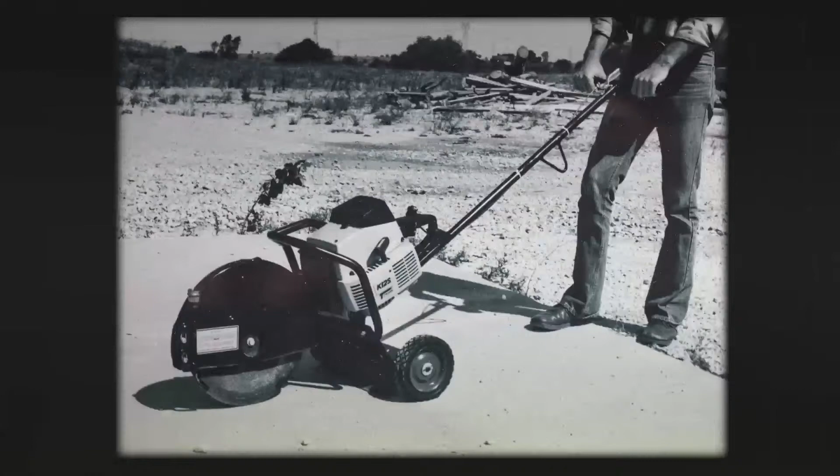The real start to Paratech was the saw. Partners Robert Benker and Howard Leibovitz discovered the Swedish chainsaw that they thought would be effective for the fire service, and that proved to be correct. It took off all over the United States. It had to have special blades. Howie Leibovitz invented a negative pitch that nobody else could replicate, so we began making those ourselves. That's what gave us the manufacturing core to Paratech. We had this capability, and now we wanted to fulfill it with new products, new ideas.

It all started back in 1962. Our first ever tool was the Pry-Axe. The Pry-Axe was developed by a battalion chief in New York City Fire Department. He had what he thought was a prototype for somebody to make it for him. This was while I was in the Army. My two partners, Howie and Bob, agreed that they'd like to try it.

The first run was 2,000 units. When I got out of the Army in 1965, my first task was to get rid of these damn Pry-Axes, because they were costing us a fortune sitting here. Little by little, they gained recognition, and we started building in improvements to the tool. Each time we made a release of forgings, we tried to incorporate features into the tool that would make it better. Every change in the tool was an improvement.

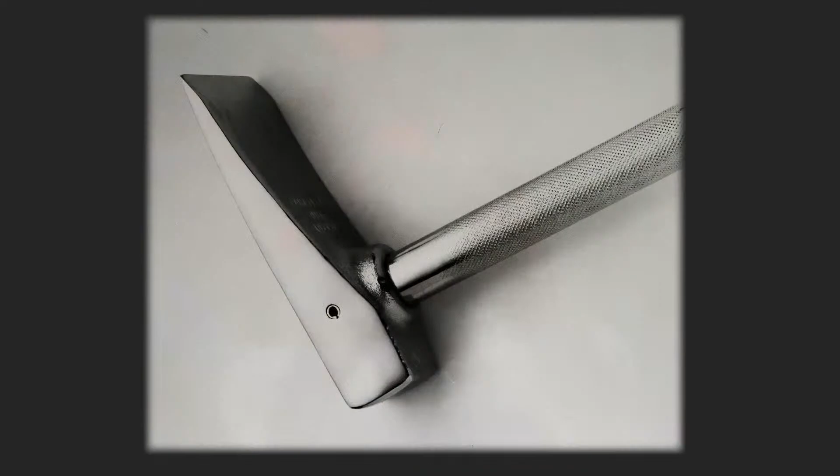From one innovation to another, meet the Halligan tool. The fire departments had very limited choices. Some fire departments were doing forcible entry with a crowbar that they got at the Ace Hardware store. So when they'd see this quick and decisive forcible entry tool, that was a fairly quick success, and we did send thousands of them. We used to weld them, but the weld wasn't as good because it was damaging the structure of the material. So we pressed this.

The first three-piece production Halligan tool, and the first to improve upon the original Chief Halligan design. I designed new claw and new head, so it's more practical. The claw is more sleek, but it's bent more, and it has a nail pulling feature. The head had two wings like on the side of the pike. When you hit it in a metal lead in a car, you could twist and open up the hole, so it became a completely different tool. And the Halligan tool has a major place now in fire departments.

Recognizing the need for new, innovative firefighting tools, the Biel tool. Howie wanted to design this very small personal tool. Spell it backwards, it's Leib. Leibovitz. That's what he wanted, so I had to do that. He wanted to have a Biel tool, and that's the name.

A few years ago, I redesigned that again. It's cast out of stainless. It's very strong, stronger than steel. It's like 180,000 psi. All we do is put a rubber handle on it. We just press it together, so this is like indestructible. The smallest, most portable axe in a fireman's arsenal. Designed by Paratech's founder, Howard Leibovitz, to ensure that even officers have a tool they can carry without restricting personal mobility.

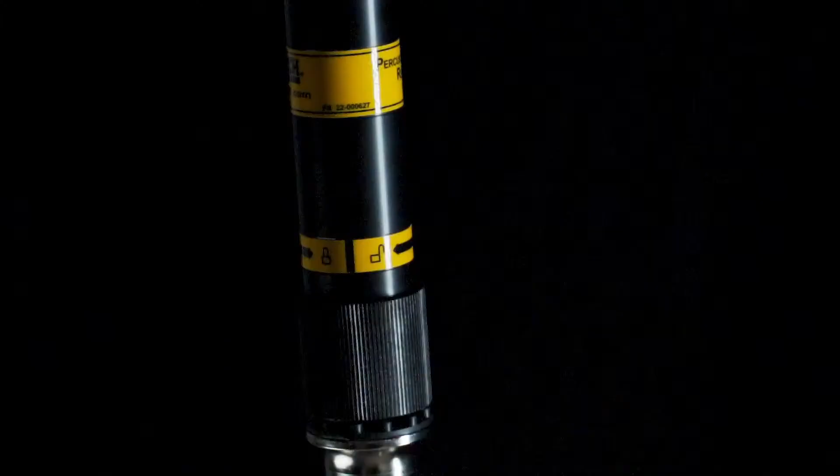There's no deflection. I wanted to make it lighter and more modern. I developed one with the aluminum housing, so it was lighter, it was more efficient, and there was a special lock that when you turn, you can lock it in different positions. All of the force that is being expended is directed at the point of the tool. The ultimate disaster preparedness tool. No strings attached. Safely direct optimum impact exactly where you want it.

New problems require new tools. Titan Crash Axe, the lightest, most advanced personal rescue axe, designed with and for the pararescuemen, the PJs, U.S. Air Force Special Operations Command.

This was the first product I worked on. Some members of the Air Force pararescue guys had purchased one of our Biel tools and tested it without us knowing about it. They said, hey, we really like this product. Here's the thing, we need the whole thing to be under 2.5 pounds, because everything that goes up in an airplane, the weight matters a lot. That's why we went to titanium.

We started that project with full-size pencil sketches, to clay models, to 3D models, to I had a whole Tupperware container full of 3D prints, just tweaking and changing things. The whole thing is skeletonized, kind of trellised out so it provides a really strong grip with gloves and gets the whole thing under that 2.5 pound limit. Engineered to be as light, strong, and customizable as possible. The only one of its kind.

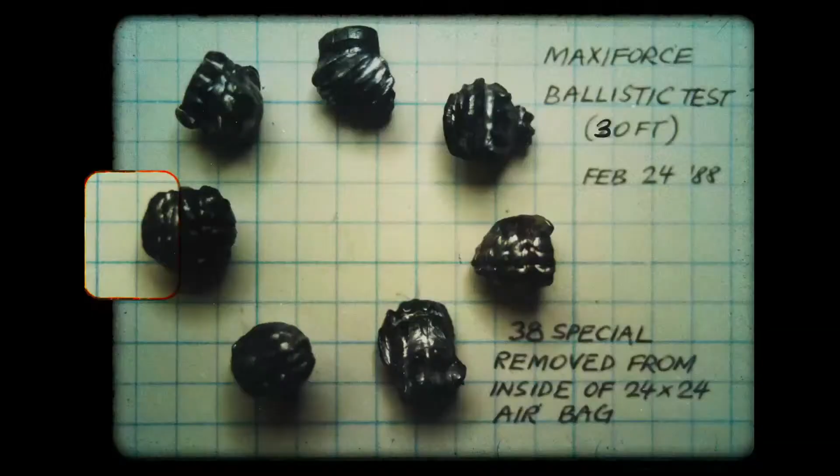I went to work and I said, Howie, why did you hire me? And he said, because you're crazy. I like guns.

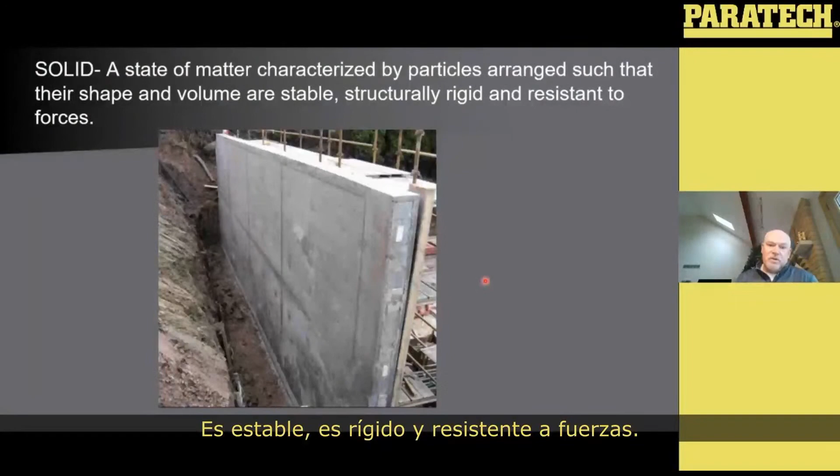But now if we look at soil, it's made up of many different particles arranged such that their shape and volume aren't stable. It's not rigid, and it's not resistant to forces. So soils really aren't a solid. And if you think a trench wall is solid, you're fooling yourself.

Looking at this image, if you go out in nature, you never see vertical soil walls. You just don't see it. Somebody might dig and it holds a vertical wall for a while, but soil just does not have the strength to maintain a vertical wall. That's why you see things like concrete and steel, and sometimes those don't even stay stable for very long due to the forces behind it.

So if you think of soil, it's made up of individual particles. You've got large sand particles, mid-sized particles that are silt, and tiny particles that are clay that can really only be seen individually under a microscope. Soil can be made up of any of these or even all of them, and it always has air around it too. So soil itself is not a solid.

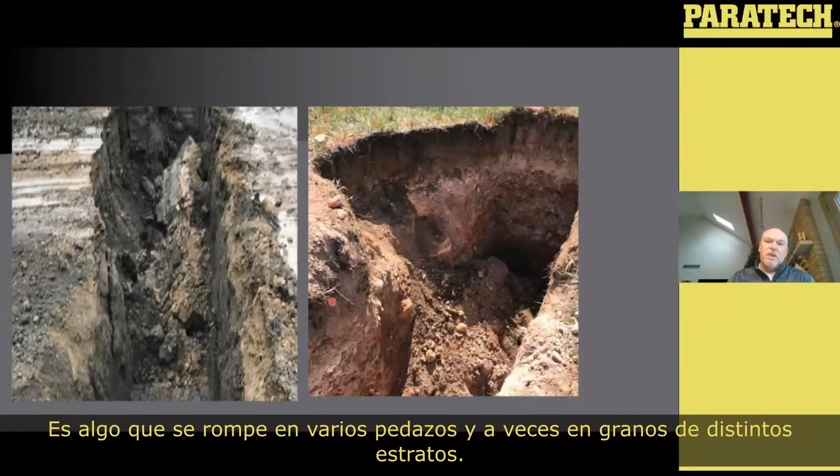So if you look at a trench when it fails, it falls into chunks of dirt. It's not a complete wall that falls off and stays solid. It's something that breaks up into pieces and parts, and sometimes individual grains if it's dry enough.

So where do the forces come from that act on a trench wall? The largest single force you have to deal with is gravity. If you can imagine gravity pulling down on all these individual grains over time, it's going to pack them in more and more. As it goes down, it starts wedging in between other particles, which creates a lateral force pushing outward. That really causes the lateral force we have to deal with when it comes to shoring trenches. It's that wedging force of particles from gravity that turns into a lateral force.

Other external forces we deal with are surcharge loads. Most often it's the spoil pile set back just behind the trench lip, but it can also be materials or equipment that are placed there. The other thing we have to worry about is vibrations. Vibrations can do a lot to destabilize the soil structure. This could be equipment running on the site, a nearby railroad, or even a nearby highway. So it's always a good idea to get everything shut down within a pretty large radius of the trench site to keep those ground vibrations down.

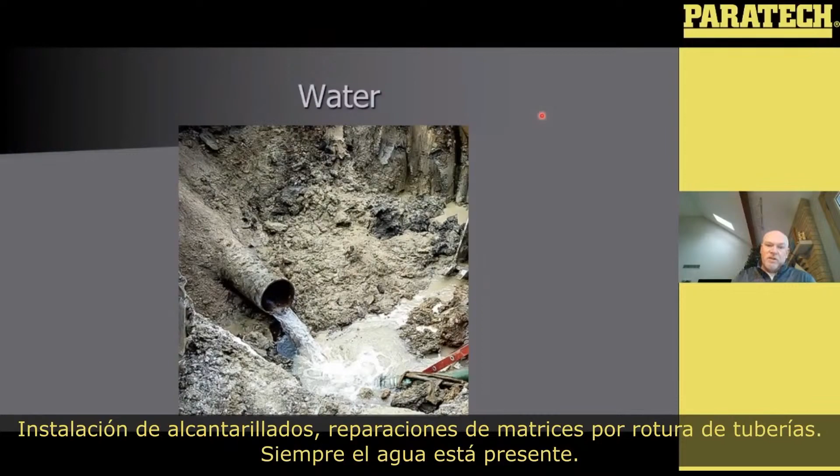Water is another problem we have to deal with all the time too. Many trenches are being dug in order to deal with some type of water issue, whether it's installing sewers, water mains, or fixing broken pipes. There's always water present, and water being in a trench can change the characteristics of the soils we're dealing with.

So what water does to us is it creates hydrostatic pressure. Like I said before, the grains of soil are all separated, with little tiny air spaces between them. And when you saturate it with water, that water pushes in every direction, up, down, and out the sides. When you get a lot of water in there, it starts increasing that lateral pressure by pushing it out sideways.

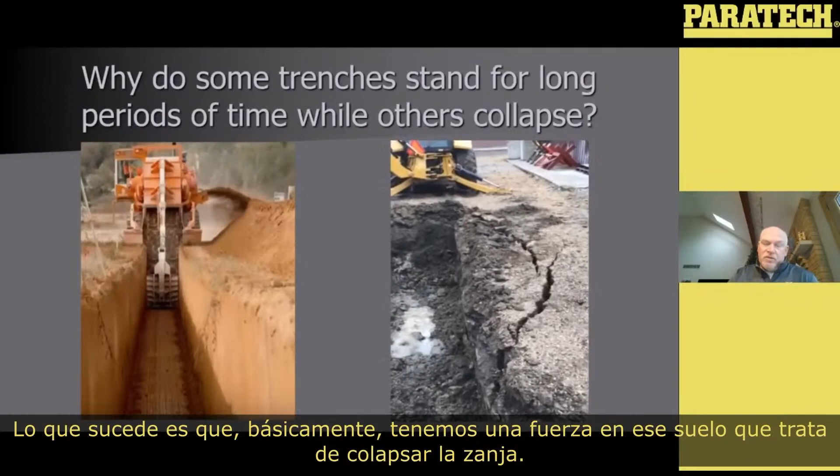If you look at the right side of the screen, it's actually a video playing. It takes a while to develop here, but you do see a shallow trench that was dug, and there's a pretty large crack in it. If you keep your eyes on the crack, you'll see it consistently getting wider and wider. So basically what's happening is you've got a force in that soil trying to collapse that trench, and the soil strength is not enough to keep it from collapsing. The result is the trench collapses.

So what is internal strength in soil? Basically, it's made of three different mechanisms: soil friction, adhesion, and cohesion. I'll explain each of these as we go forward.

So internal strength, soil friction. Basically, the particles all have some shape and angularity to them, and as these individual grains start locking into each other, that creates soil friction. If we look at the picture on the left, that is the soil when it was poured out of the cup. If you did that over and over again, you're going to get pretty much the same shape of mound there due to the soil friction of the particles.

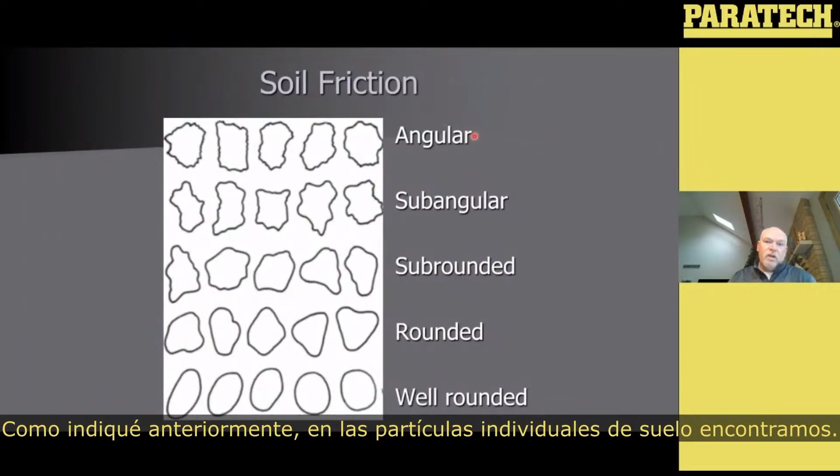So as I've mentioned before, the individual particles of soil range from angular particles all the way to well-rounded. If you imagine trying to stack BBs, you just can't do it because there's no friction between them. No matter how much you try to stack them, they always go down to the lowest point, so you're down to one layer. The same thing can happen with soil when you have well-rounded particles. Now your angular particles have more lips and edges that are going to lock into the other ones, which will give you a higher soil friction.

The other thing that plays a big part of it is the compaction of the soil. The more air you have between those individual soil particles, the more they can move around as you put loads on them - they can twist and kind of wedge in, which will push other ones sideways. Whereas with compacted soil, there's not many places for it to move; it's all been packed together already. So a compacted soil is going to give you a much higher soil friction capacity than a loose soil would.

The second mechanism we're going to talk about is adhesion. Adhesion happens primarily in sandy soils. If you add a little bit of water to it, just like we saw in that video, you can go from just having a pile to something that will hold its shape. The reason this happens is the water coats those individual particles, and once they're coated with water, they attract to each other, kind of like almost a magnetic force that holds it together.

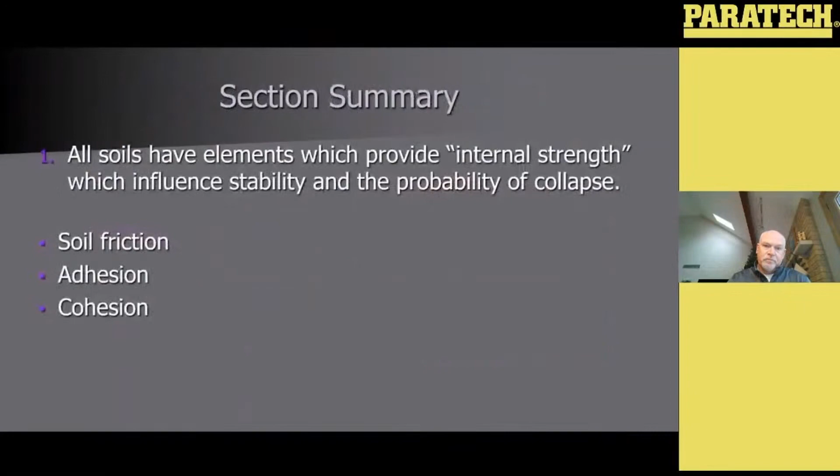So in summary, all soils have elements which provide internal strength, which influence the stability and probability of collapse. This internal strength comes from soil friction, adhesion, and cohesion. You can have any one of those, or all three, acting together to give you the total internal strength of the soil.

The opposing side of that is the external forces. These come from the lateral load that happens due to gravity, surcharged loads up on the trench lip, vibrations that can be anywhere near you, and water and its impact on soil.

So if you have more external forces trying to collapse the trench than internal forces trying to resist that collapse, that leaves you in a position where you're going to have a trench collapse. That concludes my section here, and I will hand it over to Ron for the next section.

The basic knowledge of soil mechanics that Craig presented is meant to provide an understanding of why shoring principles and practices used for stable and static soil conditions may not be applicable to the unstable and dynamic soil conditions so often found at trench rescue incidents.

Workers who install and repair underground utilities are typically on the scene during the excavation process. That provides an opportunity for shoring trenches before the soil becomes active. Rescuers, on the other hand, typically arrive at the scene after a collapse, during a time when the soil is unstable and dynamic, or moving.

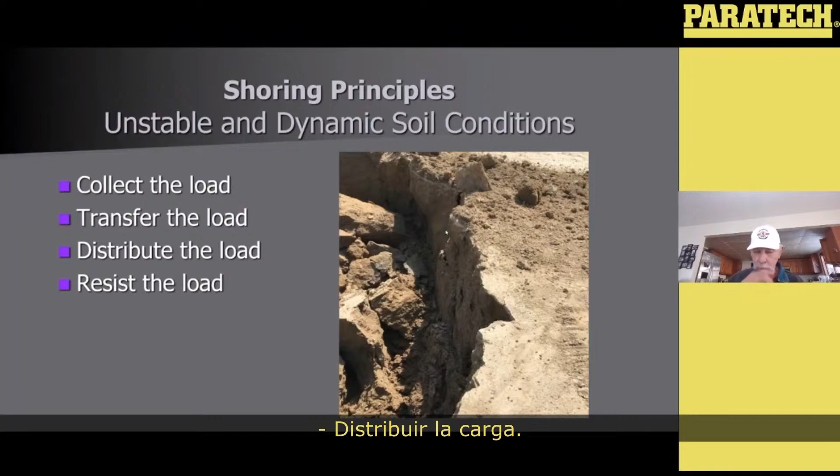These principles and practices can be found in the U.S. Army Corps of Engineers shoring guidance for structural collapse incidents. They've been safely and effectively used by urban search and rescue teams for about 2 decades.

Fundamental engineering construction for buildings includes the same principles. They include things like columns, beams. In this case, a large beam is called a girder, which holds other smaller beams. Floor joists are called beams, and those hold the decking or sheeting up above, which keeps the moving materials from falling in between the beams.

Pretty much the same concepts go on here in structural collapse shoring. The beams are up here, we call them headers and sole plates. We have posts or struts. Very, very much the same concepts that we need to put into place during trench rescue shoring.

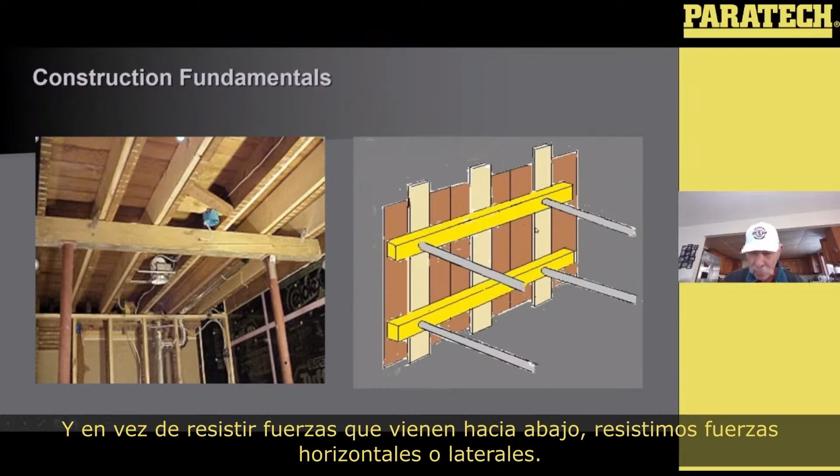With trench rescue shoring, we simply take that same construction and tip it 90 degrees, or on its side. Instead of resisting forces that are coming down, we resist forces that are horizontal, or pushing sideways, like in a trench wall.

Shoring principles: collect the load. It's very important that we utilize this principle in order to keep our small particles of soil collected together.

Trench rescue panels of laminated Arctic birch and engineered strongbacks, in what you'll learn in section 4 to be a composite construction, are very strong, and they'll collect and retain those lateral soil forces that are associated with most trench emergency incidents.

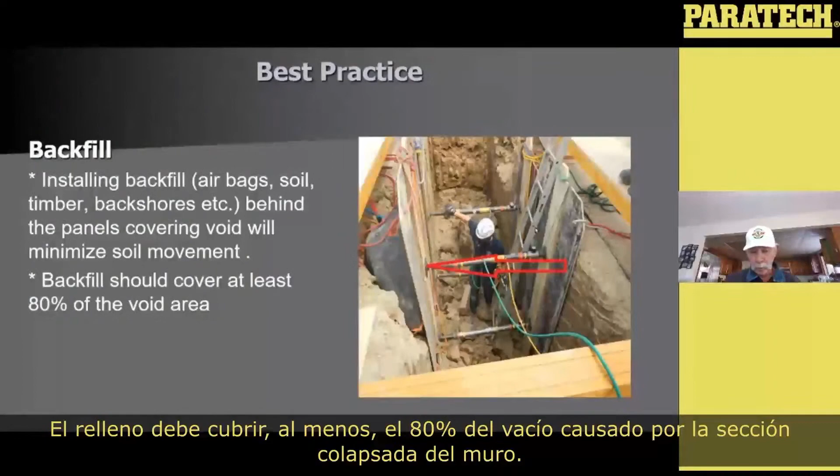Also, to collect the load in collapsed walls that have voids in them, we must fill the voids in order to maintain soil contact and prevent movement behind the panels. Backfill commonly used includes installing airbags, soil from the spoil pile, timbers, backshores behind the panels, and covering the void areas. The backfill should cover at least 80% of the void area caused by the collapsed section of wall.

Transferring the load from a soil wall to a point of suitable resistance. So how do we take the moving part of the wall and transfer that load to resist and keep it from moving? It's called transferring the load, and we do that with struts.

The best practice for struts is struts that are readily adjustable in length, have measurable activation forces, and can be installed and removed without entering the trench. Those are the best practices for unstable and dynamic soil conditions.

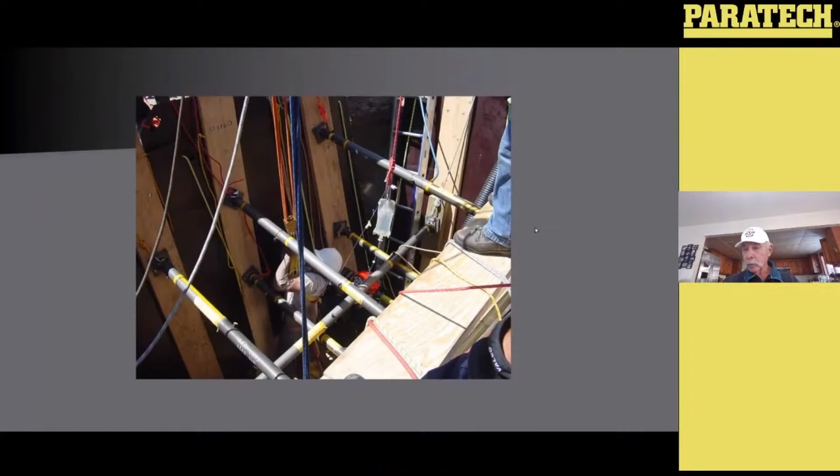Both Paratech gray struts and the longshores, or what we call the gold struts, are capable of rapid adjustments from air pressure. We can expand the length of the strut very quickly and easily. The pneumatic controllers and gauges provide measurable activation forces. And most importantly, both Paratech gray and gold struts can be installed and removed without entering the trench.

There's a lot of confusion over the topic of strut pressures and forces, and we'd like to try to help eliminate some of that confusion.

To begin with, we need to understand there are two distinct forces associated with the use of struts. One force is called the strut activation force. All struts used for trench rescue shoring have a mechanism that creates an activation force. With timber struts, we typically use opposing wedges or screw jacks to tighten up the struts and create that strut activation force. With hydraulic and pneumatic struts, they use cylinders and compressed fluid or air to create those activation forces.

That strut activation force in these pneumatic struts is a result of the area found at the end, how many square inches are at the end of the strut's piston. We have a diameter on the gray struts of 2.5 inches in that area, and 3 inches on the gold struts. The formula for that is pi times the radius squared, and remember that the radius is half of the diameter. So in this case, on the 3-inch strut, the radius would be 1.5 inches.

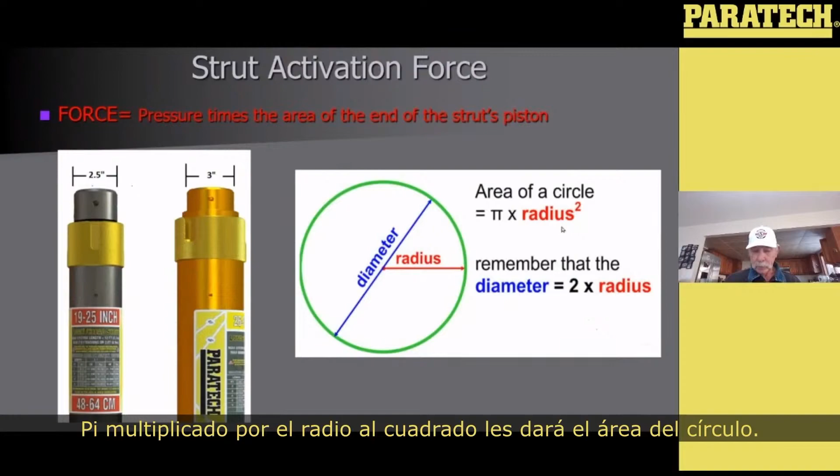Radius times radius times pi, or 3.14 - we'll give you a couple of seconds to write that down if you want to write down that formula. Pi times radius squared will give you the surface area of that circle found at the end of the piston on the struts.

The best practice for activation forces in collapsing and unstable soil conditions is to get an activation force of between 1,000 and 1,250 pounds. With the gray strut, the 2.5-inch diameter, using our formula, we get a surface area of almost 5 inches. So an example of how to use that formula: if we set our gauge at 200 pounds per square inch, and we have 5 square inches, we multiply 200 times 5, and that gives us an activation force of about 1,000 pounds. If we up that to 250 pounds, still times the 5 square inches, we get 1,250.

With the gold struts, because it is a bigger diameter, our strut pressures in pounds per square inch are less, but we're still trying to get very close to that best practice activation force of 1,000 to 1,250 pounds.

The activation force is important. It pushes the panels and wales tight up against the wall, so we want enough pressure and force for that to happen. And two, the activation force of the struts can actually make the panels and the wales stronger and give them more capacity. So we don't want too much pressure, but we don't want too little pressure. In these types of soil conditions, 1,000 to 1,250 pounds is what we're shooting for.

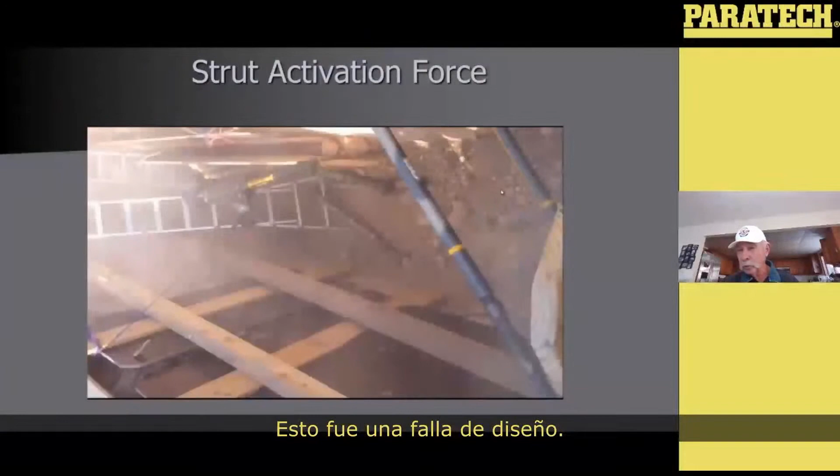This was a failure of the design, which was put together or dreamed up by a firefighter and never was reviewed or designed by a professional engineer. And those are the kinds of myths and folklore. This thrust block system, the original thrust block system, was never engineered or tested, and it is a dangerous system.

If you're using that system, I would urge you to stop doing that and find another alternative for your L-shaped trenches. Write this down. This is a pretty good, simple rule to remember.

If the shoring system you're setting up cannot resist the recommended strut activation forces, it will in no way be possible for that system to resist the forces of dynamic soil pushing against it. It just can't happen. So if your system is moving when you put the strut pressure to it off of your air gauge, you have a poorly designed system, and you better get something else in place.

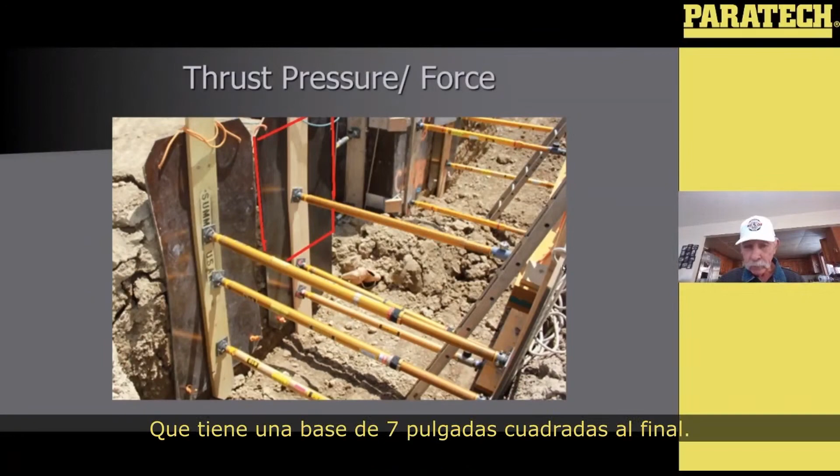It transfers that load to the wall on the right side, transferring 14,000 pounds of force through a very concentrated or small 3-inch diameter strut that has a 7 square inch base at the end. That is what's called the thrust pressure.

The thrust pressure is really what we need to be concerned about being able to resist. The activation force puts our strut into place. We have to be prepared for the thrust pressure or thrust force that the soil can create. Again, those myths and folklores that have entered into our shoring systems, this thrust block system just does not work.

The next principle is, after we've collected the load and transferred the load, we need to get it across the trench and distribute that load over a larger area than the strut base size. Struts transfer the load to a point of resistance in a very concentrated manner. That concentrated load placed on the trench wall with weak and unstable conditions can actually cause rather than prevent collapse.

So the best practice for taking the load coming through the strut is to place a strong and stiff trench rescue panel between the strut base and the wall. That helps distribute the force of the thrust against, in this case, a 4x4 section of panel rather than a 5 or 7 inch strut, the end of the strut piston.

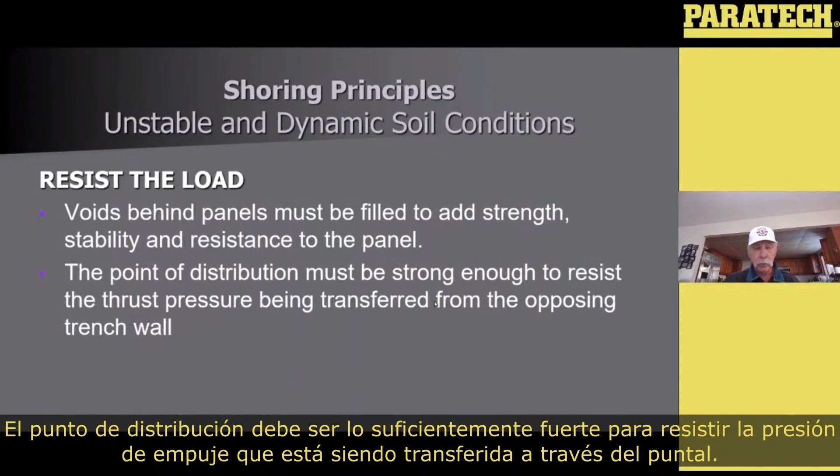The last very important part of the shoring principles is to resist the load. Voids behind the panels must be filled to add strength, stability, and resistance to the panel. The point of distribution must be strong enough to resist the thrust pressure being transferred through the strut.

The way we resist the load, we showed earlier this airbag in place to help collect the load from the force of the soil coming from left to right. But we also need to have that resistance or backfill in place to strengthen and help resist the force coming from this trench wall moving from right to left. So we need to fill that in, and backfill should cover at least 80% of that void area.

So for shoring dynamic soil conditions, the unstable, collapsing conditions we see at most of our trench rescues, these are the important points: collect the load, transfer the load, distribute the load, and resist the load.

There are other types of shoring with different principles. Basically, the types of shoring done in underground construction work, where right as the trench is being dug, shoring can start before the soil loses its internal strength and starts to move.

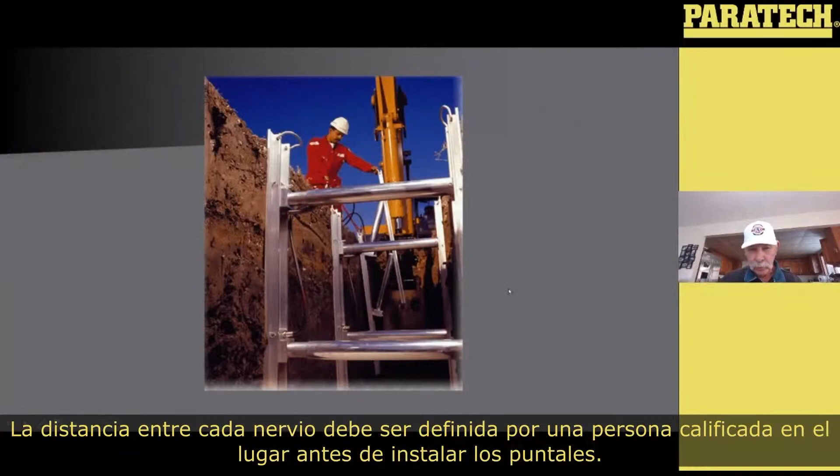I asked our group of structural engineers how they felt about using that skip shoring idea at trench rescues. Dr. Marie Labaud did a study and wrote her dissertation for her doctorate degree on that particular subject. She says that in dynamic soil conditions, without the use of sheeting in between your struts, there's an unaccounted for force right at the face of the trench in between the struts. In real world applications of trench rescue, that exposed face is likely to blow out and cause the trench wall to collapse.

With skip shoring, the manufacturers of hydraulic shores put together this system where they have vertical rails and struts going down the rails to create points of resistance. But they also came up with something called a spot shore, made to use in conjunction with these vertical shores, to supplement the skip shoring in places where there's obstructions like pipes or utilities crossing the trench where that vertical upright just wouldn't fit. So we can use the two of these together. That was the original use of spot shores.

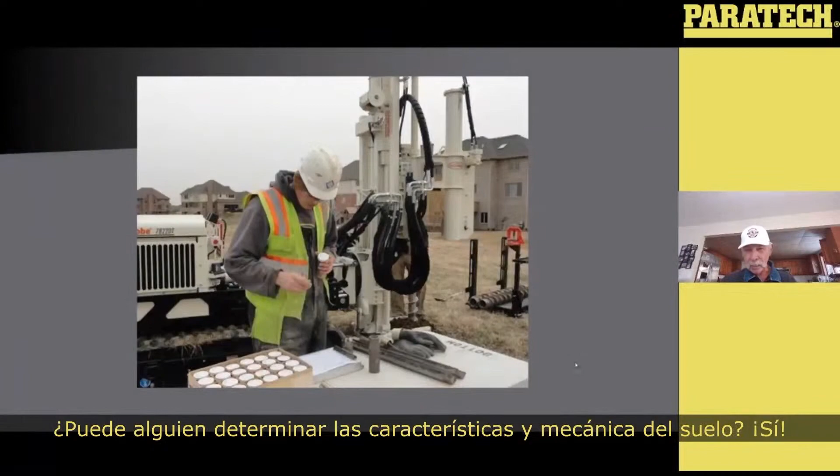Dr. Taylor tells us that the use of skip shoring or spot shoring is only valid for an extremely limited number of soil conditions, and in those soil conditions, the soil properties and behavior characteristics have to be known. He says that such conditions and knowledge are essentially never encountered at a trench rescue situation. So can somebody go out there and determine those soil characteristics and mechanics? Yeah, somebody like a geotechnical engineer using soil boring samples and laboratory type testing could do that pretty accurately. The chances of you and I going out there and accurately making that soil analysis are slim to none.

And Slim just left town. It's just not going to happen. It would be a crapshoot. This is my poster child for reasons that we shouldn't be using field soil analysis to make any determination of how to shore a trench.

This is a very qualified person with quite a number of years of experience working for a large city in North America. She determined that this soil was stable, had an equivalency to an OSHA type A soil reading condition, and she entered the trench. Shortly after that, this soil that she thought was stable was unstable and collapsed, and could have killed her.

It pinned her. The local fire department arrived and knew this lady and asked her what the soil conditions were. She told them still type A soil equivalent. They went ahead and used this thing called spot shoring - they did their own version of spot shoring, trying to expedite the rescue. They took high risks by using this particular shoring principle in this type of soil.

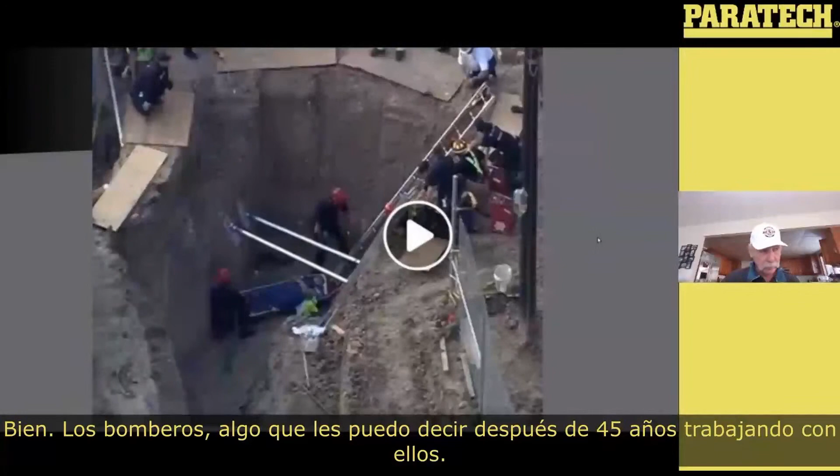Would not recommend it. Now, firefighters, I can tell you after 45, 46 years of working with firefighters, they will stretch the envelope. So if you tell them that spot shoring has to be placed every foot apart, they'll stretch the envelope and end up doing something like they did on this actual rescue scene. It can be very shaky. The fact that they did something, and it worked and it didn't collapse, makes firefighters want to think that it's okay, that it's proven.

Let me tell you about this one. This is my Orange X shore. I have set this Orange X shore up on a variety of different soil conditions across the United States 73 times.

During those 73 times of shoring with my Orange X, the soil never collapsed. The trench wall never collapsed. So the fact that you did something doesn't mean that it's good, and it doesn't mean that it's safe. You might have just been lucky. And as Chief Brunacini told us years ago, good luck can make you dumb because it makes you think you're smart. That's what I'm afraid of with this idea called spot shoring.

Soil arcing principles for skip shoring and spot shoring work in some soil conditions, uncommon soil conditions for us responding to trench rescue. They do not work in unstable and collapsing soil conditions.

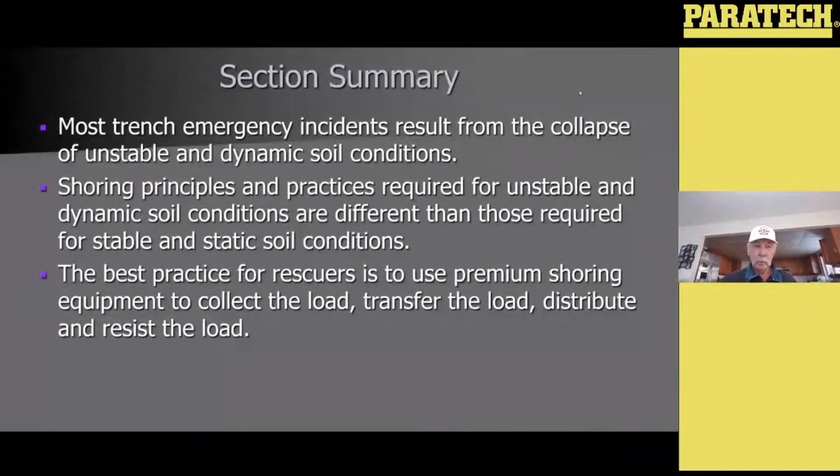Section summary: most trench emergency incidents result from the collapse of unstable and dynamic soils. Shoring principles and practices required for unstable and dynamic soil conditions are different than those that may be required for things like stable rock or some Class A, very stable clay conditions. The best practice for rescuers is to use premium shoring equipment to always collect the load, transfer the load, and distribute and resist the load. You won't go wrong if you use that principle. You may be in deep trouble if you use other principles that are not based for those types of soil conditions that we encounter at trench rescues.

In section 3, we'll learn about a new method that was designed for first responders to rapidly and accurately determine worst-case lateral soil forces. It's important for us to know lateral soil forces so that we can select the shoring equipment and materials that'll both protect us and get us in the trench quickly. It's time to pull out your notepad and pencil and put on your thinking cap.

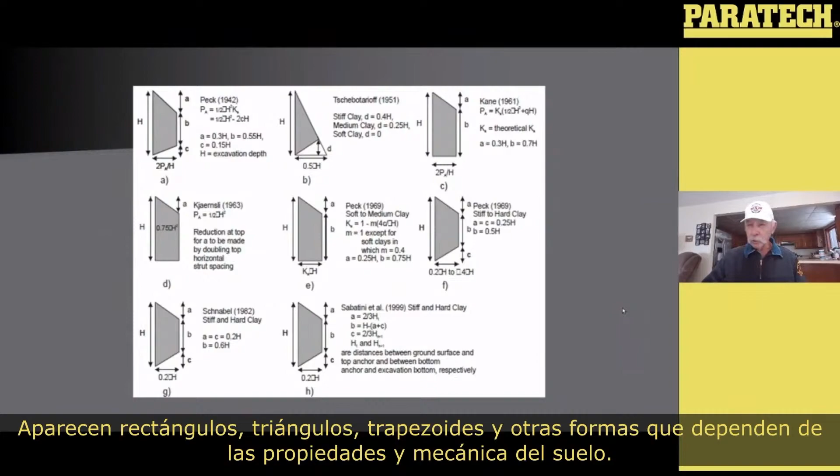Civil engineers have several theories and formulas to help them determine lateral soil forces for different types of soil. This drawing shows a variety of soil pressure diagrams, which are part of the process. The diagrams represent a number of geometric shapes that soil can exert forces on. They include rectangular, triangular, trapezoidal, and other shapes which are dependent on the soil properties and mechanics.

Unfortunately, all of those soil pressure diagrams require soil analysis equipment, expertise, and experience that first responders just don't possess. So a big problem exists in that first responders do not have a way to rapidly and accurately determine those lateral soil forces that are going to have an effect on your trench rescue shoring system.

In 2018, Dr. Oliver Taylor and Dr. Marie Labaugh, at the request of the Army Corps of Engineers and FEMA structure specialists, designed a method for first responders to rapidly and accurately determine lateral forces at the scene of a trench emergency. The methods have been published in an international civil engineering journal and have been reviewed and vetted by structural specialists from FEMA, SUSAR, and the U.S. Army Corps of Engineers Urban Search and Rescue Group.

The beauty of this method is that it does not require technical equipment, expertise, or even a lot of experience. The TL method requires just a tape measure to determine the lateral soil forces and a method for using the specific tabulated data for trench rescue shoring.

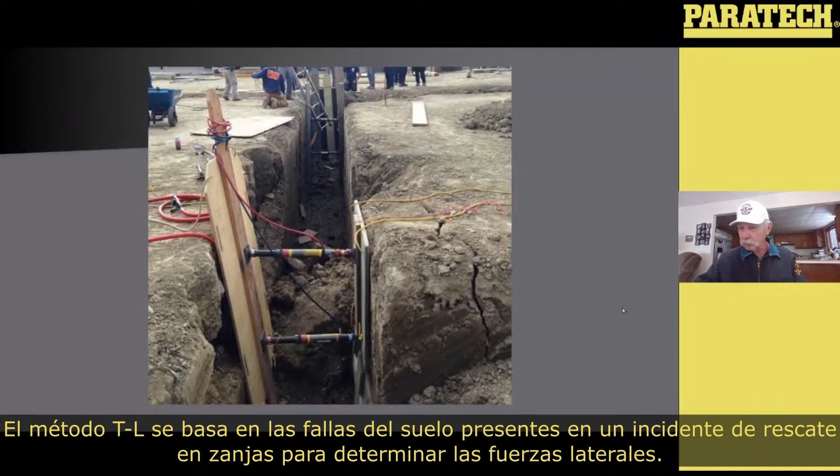The base of the TL method uses the soil failures present at a trench rescue incident to determine the lateral soil forces and to predict future soil failures. Dr. Taylor tells us that the answers to the questions are right there at the trench. Unlike the methods used by engineers that determine soil forces based on soil properties and mechanics and soil pressure diagrams, the TL method uses the size of the largest failure present to determine the lateral soil force that will push against your shoring system.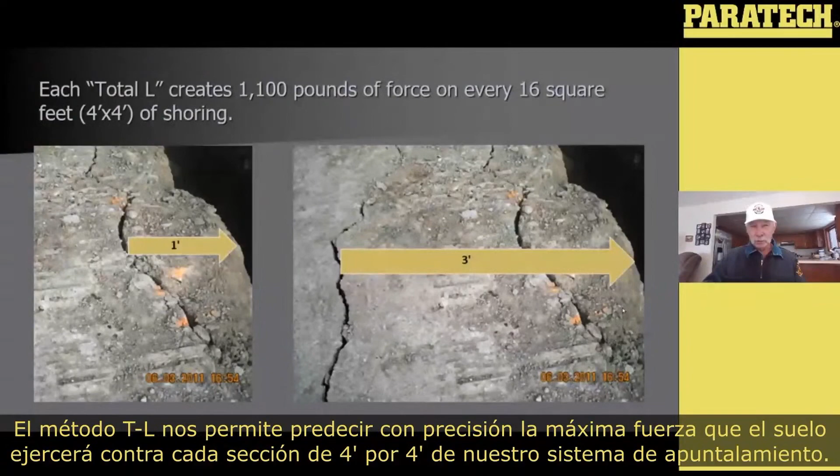The resultant used in the TL method is based on 16 square feet, creating 1,100 pounds of lateral force against your shoring system. Since the formula uses 16 square feet, or a half panel, as a constant, we simply need to add one more dimension to change square feet into cubic feet. That dimension is the distance from the trench wall back to the farthest point of failure. In the photo on the left, that's about a 1 foot span. So 16 feet of panel in front of this section, going back 1 foot, gives us 16 cubic feet of soil pushing sideways against your system.

The fissure or crack, the breaking point of the soil on the right, is larger. It is 3 feet back from the wall, so that represents 3 times the amount of soil pressure on the left. That's 3 times 16, or 48 cubic feet of soil, and 3 times 1,100 pounds. This one would be pushing on each 4 by 4 section of panel with 3,300 pounds of force.

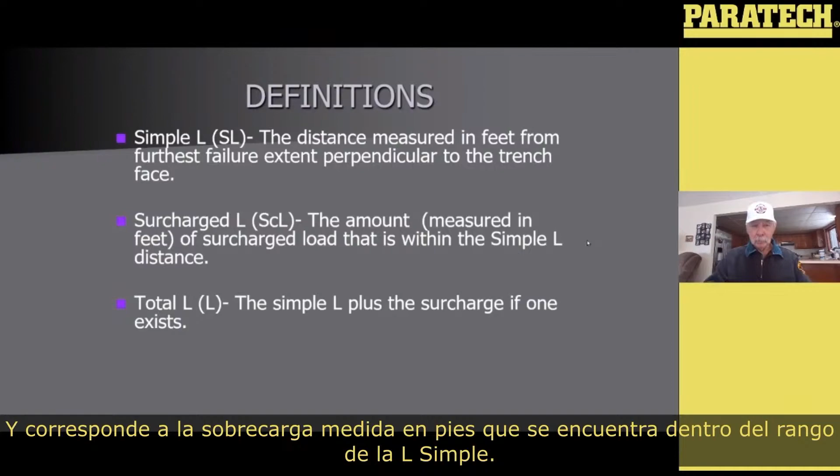There's something called a surcharged L, and that is the amount measured in feet, always rounding up to the next foot. If you have something that's 2 feet 8 inches, we call it 3 feet. It's the amount measured in feet of the surcharge load that is within that simple L distance. Finally, the total L is the simple L plus the surcharge, if a surcharge exists. In other words, if a heavy object is within the distance of the simple L, then a surcharge exists.

Let's take a look at this thing called the simple L. It is the distance in feet measured to the farthest failure extent that's perpendicular, or at 90 degrees, to the excavation face. Here we have three failures in this particular trench. The one at the bottom is a slough-in type failure that goes back about 2 feet from the original trench wall or face. There's another one above that, a little less than 2 feet. And then there's the farthest extent of failure at 4 feet, a pretty deep and big fissure. So we have 3 different measurements, but the one we use as a simple L is the 4 foot, and we call that a simple L of 4.

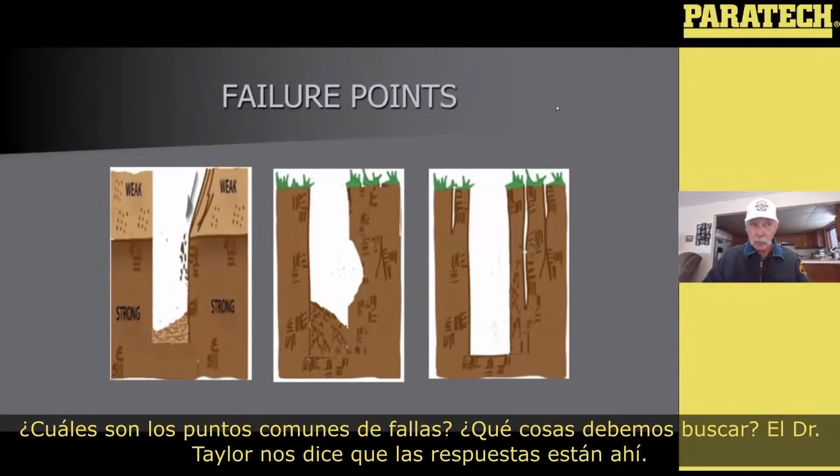What are common failure points? What are we supposed to be looking for? Dr. Taylor tells us the answers are there. Here's what we want to look at: the distance from the original wall back to lip shear. Usually those are just a couple of feet. Lip shears are usually not a big simple L, but we need to measure that. If that is the farthest point of failure, we're going to use that as our simple L.

Other types of collapses would be that slough-in. So as an estimation, you can get a tape measure up at the top without standing over the slough-in, and estimate the number of feet from the original face to the very farthest point of failure in the slough-in.

Another thing would be deep and significant fissures or cracks. This one here would probably result in a pretty good sized wall shear, but until it shears off, we just count this particular fissure. When does a crack become significant? There can be small cracks on the surface on the lip of your trench from drying out — especially clays tend to dry out and get these superficial cracks and fissures. But whenever a crack is more than 1 foot deep or more than a half inch wide, we're going to count that as a failure point.

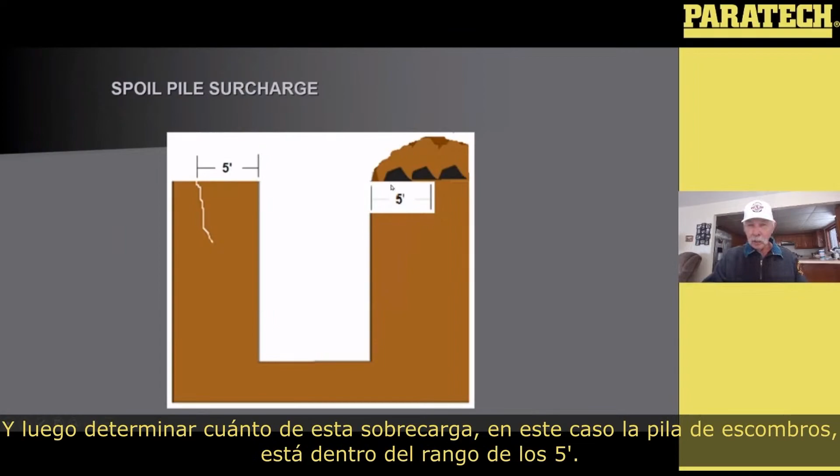Spoil piles: take a look at the spoil piles. What we're concerned about is finding that SL, the simple L, the furthest point of failure at the trench, and then determining how much of this surcharge — in this case the spoil pile — is within that 5 feet. Now, if there was a crack or a fissure here, you wouldn't see it because the pile has covered it up, so I just superimposed that 5 foot mark.

So you could see in this case, because the spoil pile is all the way to the trench wall, all 5 feet of that simple L distance is covered with this object, this spoil pile, and that is the surcharge. So we would use the amount of surcharge as the number 5, as well as the simple L, 5.

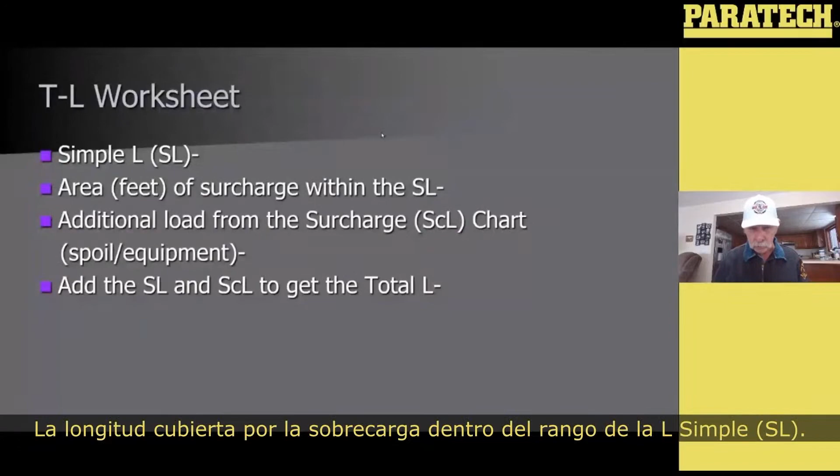Take a second, get your notepad out, write down these 4 things. Simple L, the area of the surcharge within the simple L. Additional load from the surcharge, which is going to come from a chart that we're going to learn to read in just a minute. And number 4, how much do you add to the simple L to get the total L? How much surcharge do you add to the simple L to get the total L? Copy that down, you're going to be using that a few times during this section.

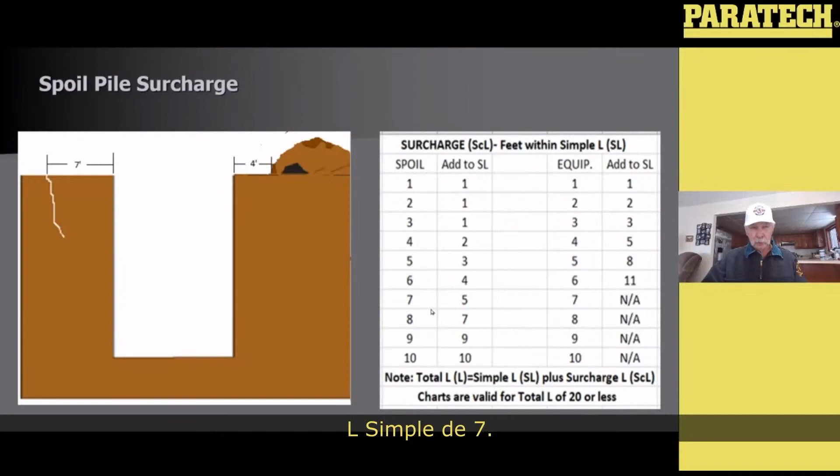And this is what your worksheet should look like based on a simple L of 7. There are now 4 feet of that 7 that don't have a spoil on it, leaving 3 feet of surcharge within our affected simple L area. So it should look like this. The simple L is 7. How many feet of that spoil pile is within that 7? There's only 3. How much do you add from your chart? When you went down to the 3, it told you to add a 1. In this case, we add the 7 to the 1 and come up with a total L of 8.

Surcharge for heavy equipment. Measure that simple L, the point, whatever it is. I'm making it real simple on these. A lot of times you're going to have multiple points of failure, and you're going to take the one that is farthest away from the trench wall. So to make it simple, this one we have a simple L of 5, and then see if any of this machine is sitting within 5 feet of the trench wall. This sits back 4 feet, so that would leave 1 foot of this machine that we're going to be worried about. Okay, 1 foot. Then we're going to take a look at the equipment side of the surcharge chart, and then add them together to come up with the total L.

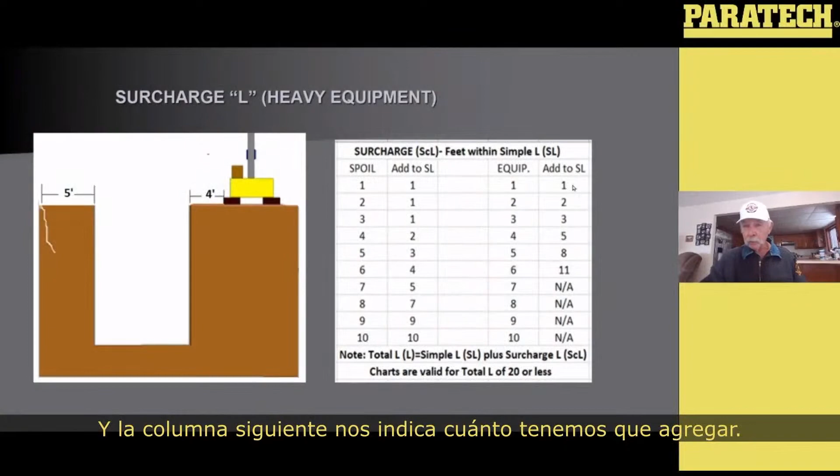So again, 5 feet is the simple L. There's 1 foot, and we're going to go all the way over here to the right to the number 1. There's 1 foot of equipment that is within that simple L. Then go to the column next to that, and it tells us how much more to add. Now, remember, each time we add a 1, we're adding an additional 1,100 pounds to that 4 by 4 foot section of panel. If we've got a 3, if we need to add the number 3, that would be adding an additional 3,300 pounds to that panel and the strut holding the panel.

So in this case, it would just add a 1, and we would add the 1 to the 5, and we come up with our 6.

So try this one on your own. The simple L is 7. The machine is sitting back 3 feet from the wall, and you need to determine how much machine is left within the 7 feet of the simple L. Fill out your worksheet, the 4 points on your worksheet, and see if you can come up with the correct total L, because the total L is what we're going to use in the next section, section 4, to select the proper strut, the proper panel, and the proper wale.

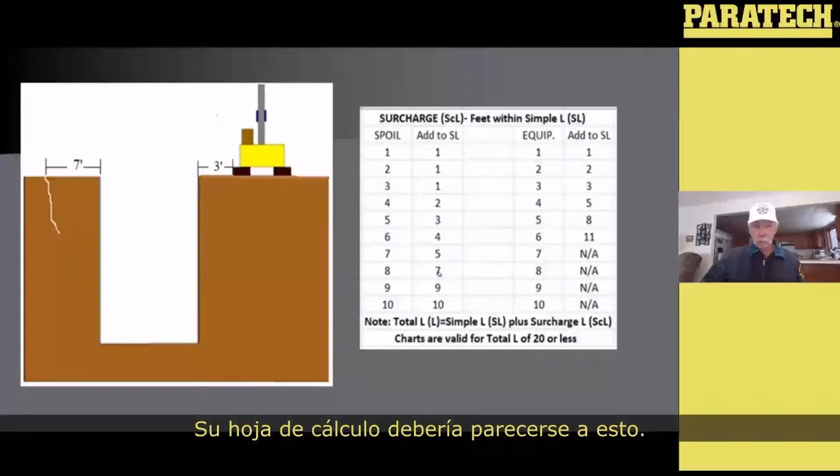Here's what that worksheet should look like. The simple L was 7. There was 3 feet of that not in the 7, right? It's set back 3 feet. So that gave us the area within the 7 was 4. And then when we looked at our chart, next to the 4, it said add 5, because it's equipment. Equipment is going to be always heavier than the spoil pile, so that you get a larger number to add. And then we would add the 7 to the 5 and come up with a total L of 12.

Now, equipment, we're going to consider things like a dump truck, a front end loader, an excavator, a backhoe, heavy steel or concrete pipes that are sitting on the lip of your trench in your rescue area, right? And if they're sitting back farther than the distance that the simple L is, farther back than what your failure has occurred, we're not going to count that. We don't have to worry about that.

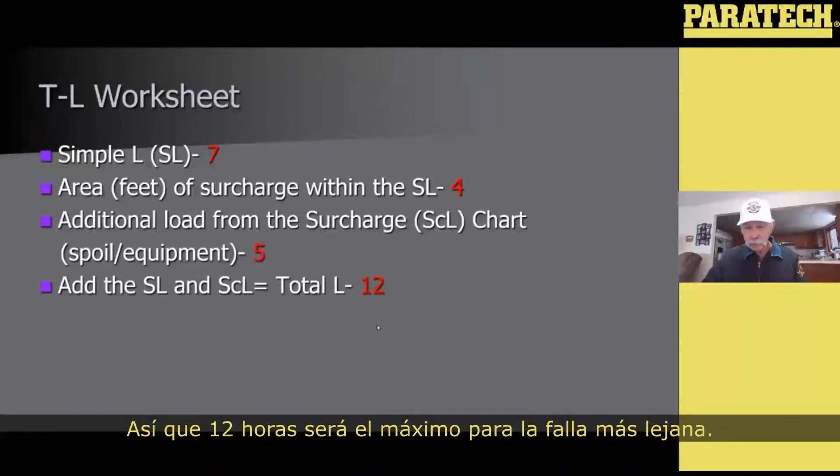According to our engineers, the point of farthest failure is going to be, we can predict that things will happen within that point of farthest failure within the next 12 hours. So if you can't execute a rescue in 12 hours, you probably won't be worried about doing this type of calculation. You probably ought to start out by retraining your whole trench team, right? If it's taking you more than 12 hours to get a guy out of a trench. So 12 hours, that farthest point of failure is going to be the maximum. I mean, absent something like a 747 landing on your trench lip and parking right over your rescue area, there's nothing significant enough that's going to happen that's going to make that worse than that.

So now what happens when there's no failure? This has never happened to me before. Every one of the many trenches that I've gone to for body recoveries and rescues have always been a result of a collapse or soil failure. But in the event, maybe less than 25% of the time, you come to a trench that hasn't collapsed or hasn't shown any point of failure. You have to figure out a way to determine how you're going to shore this thing.

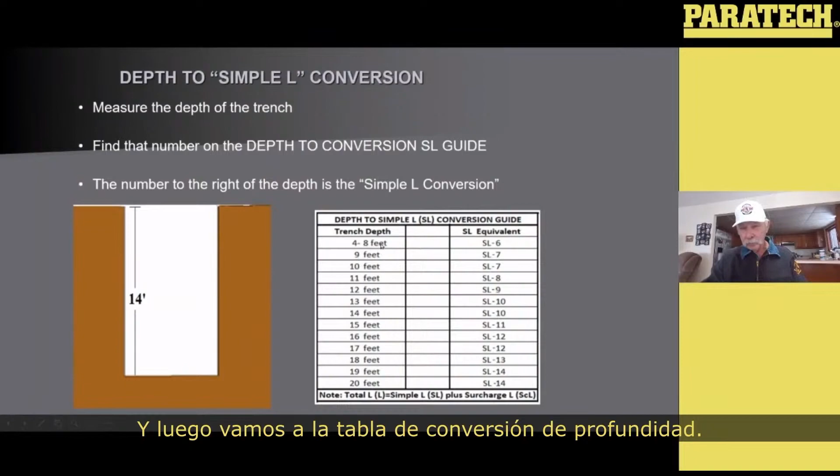And there's a depth conversion, a depth to simple L conversion chart that we have here on the right. So what do we do? Instead of measuring to the simple L, because there is none, we're going to measure the depth of the trench. And then we're going to come over to the depth conversion chart. And anything under 4 feet, you're probably not going to shore anyway. But 4 to 8, I've lumped them all together and said the equivalent simple L for something 4 to 8 feet is going to use a 6. Simple L is 6. And then each foot after that down to 20 gets its own designation. So in this case, 14-foot deep trench, we follow the column down on the left to the 14, go across, and it tells us that that has a simple L equivalent of a 10, simple L 10.

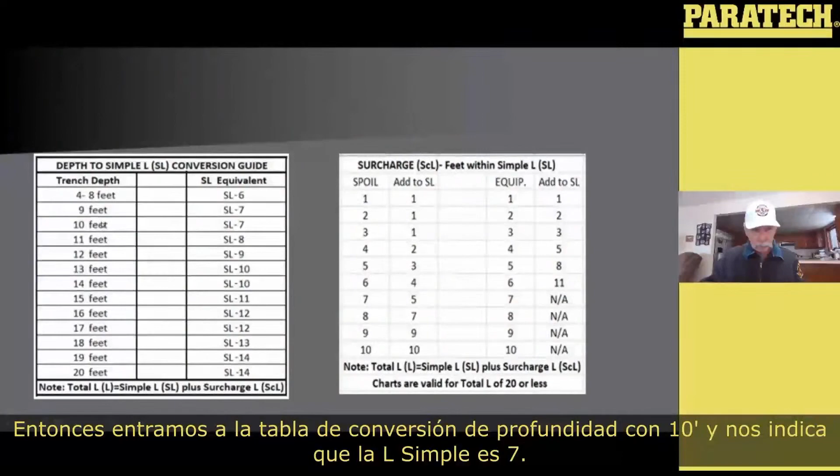Okay, on this one, this example, we have a depth of 10 and no failure, right? But we also have a spoil pile. So we need to take a look at our depth conversion chart and see what's the equivalent conversion of a 10-foot deep trench. What is my simple L? And then I can figure out how much of that spoil pile sits within that simple L. So we had 10. We come down the depth conversion chart to 10 over to the right, and it tells us that the simple L is 7.

Back from this slide, the spoil pile sets back 2 feet. If the concerned area goes back 7 feet, that means 5 feet of that spoil is within my simple L. So I go to the spoil pile side, down to the 5, and come across, and it tells me I would add 3,300 additional pounds of lateral force to the system. So simple L of 7, 5 feet of that are within the simple L, tells us to add 3.

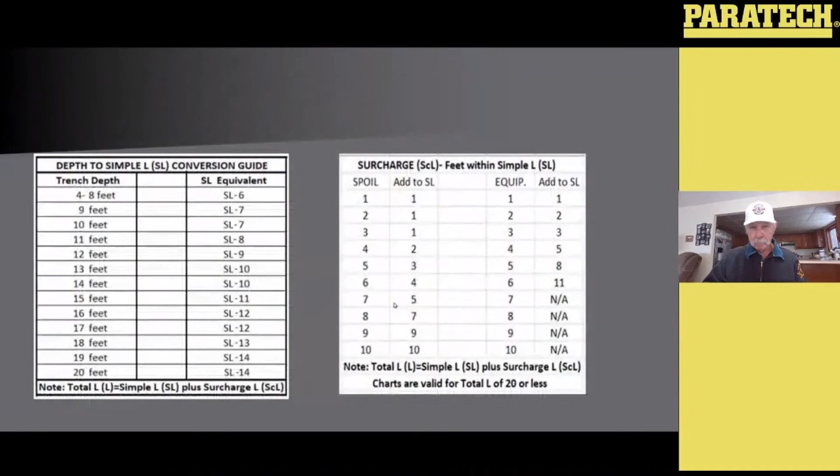Do this one on your own. This is an 11-foot deep trench. Jot that down, and then move over to your charts. The spoil pile sits back 4 feet. Use your depth conversion to figure out what simple L an 11-foot deep trench gives you, and then determine how much spoil pile is within that converted simple L. Write those 4 numbers down on your worksheet.

Your worksheet should look like this. The converted simple L was an 8. 11, right, simple L was an 8. The area in feet within that simple L was 4, because that machine set back 4 feet, so there was 4 feet left within the 8. And it tells us on our surcharge load to add 2. So we take the converted simple L of 8, add 2, and we have a total L of 10. And that's how we do the depth conversion.

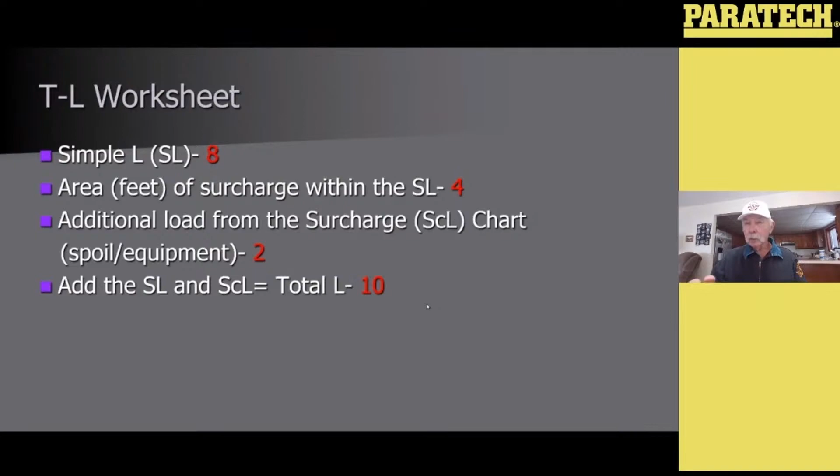All of these charts that we've been showing you up on the screen are going to be available with a link. We're going to provide you with an operations level shoring ops guide that will have those charts in it, and you can print that up as a pocket guide to carry with you if you choose to use the TL method and our TL method tabulated data.

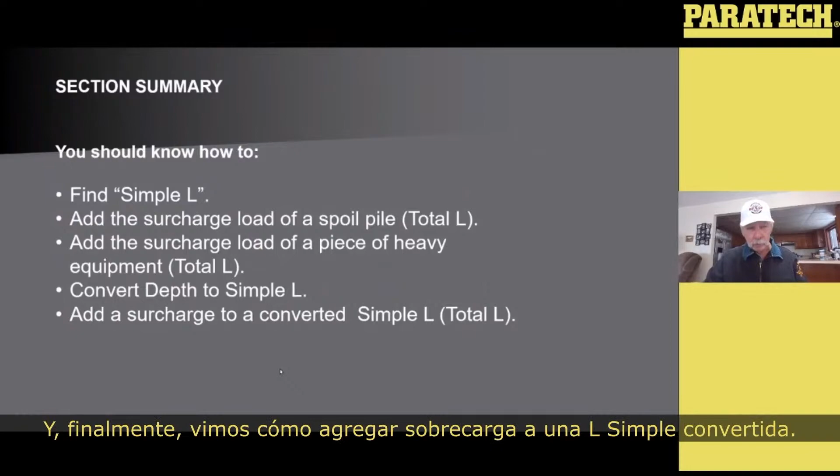So the section summary: you should know how to find that simple L with your tape measure, how to add a surcharge from a spoil pile to determine a total L, how to use the chart to determine the surcharge load for equipment, how to convert depth to simple L, and finally, how to add surcharge to a converted simple L. Just be able to do all of those things.

If there are things in here or in this summary that aren't sinking in, make sure that you include those in your questions and submit those so we can go back and resolve the things people are having problems with. So, okay, you can do this thing now, the TL method, you can determine the soil lateral forces - so what? What is that going to do for you?

Okay, well, here's the deal. The total L is the rapid and accurate estimation of the lateral soil forces in worst case trench rescue soil conditions. If you can figure out the worst case conditions and set up a proper selection of shoring equipment to safely, but not over-shore to take too much time, but safely get in there quickly, and you use that same method for all trenches you come to, it's going to be quick and it's going to be safe, okay?

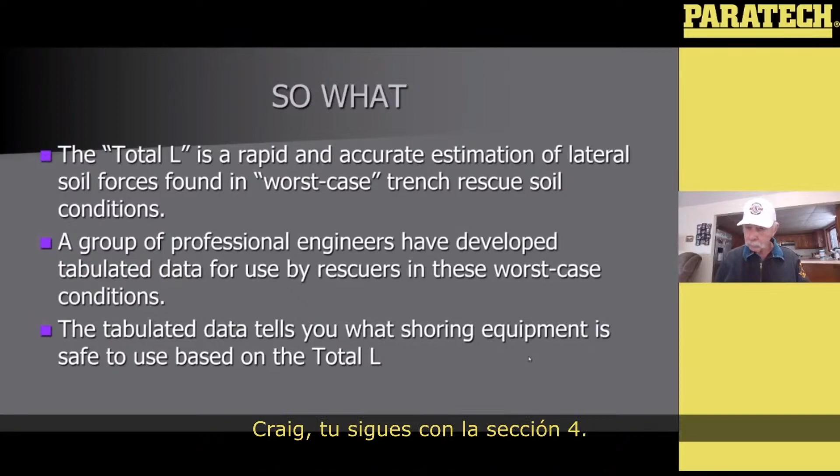A group of professional engineers have developed tabulated data for rescuers for these worst case conditions. That tabulated data will tell you what shoring equipment is safe to use based on this thing called the total L. And in the next section, section 4, Craig Dashner will show you how to use the tabulated data once you can determine the total L. Craig, you got section 4, buddy.

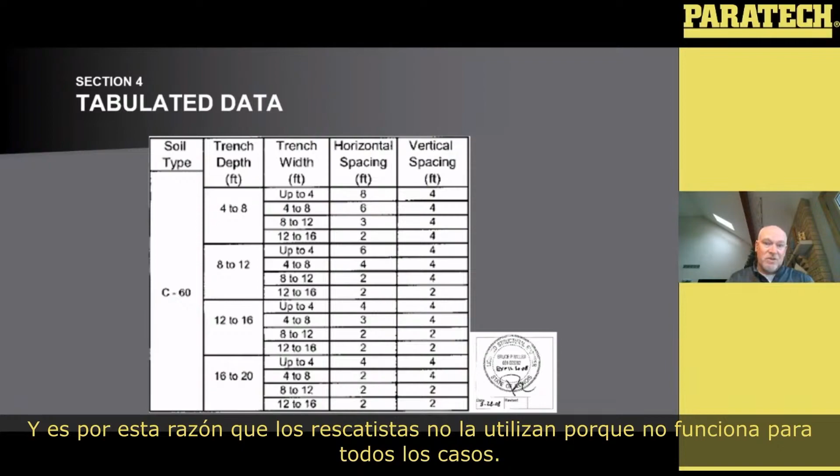Now, charts like this have been part of tabulated data for a long time, but they haven't been especially useful to the rescue industry. You can understand that primarily by looking at the horizontal spacing - anywhere from 2 feet up to 8 feet. Most of you know our rescue panels are basically 4 foot by 8 foot sheets of plywood, and if we use those in a vertical orientation, struts are just naturally going to be spaced every 4 foot horizontally, then vertically adjusted to fit. It's for this reason that rescuers primarily haven't used this tabulated data - it just doesn't work for their situations.

The tabulated data we're going to present is for worst case dynamic soil conditions. As Ron showed in the TL method, it uses clues on scene to help you understand what kind of soil pressures you get.

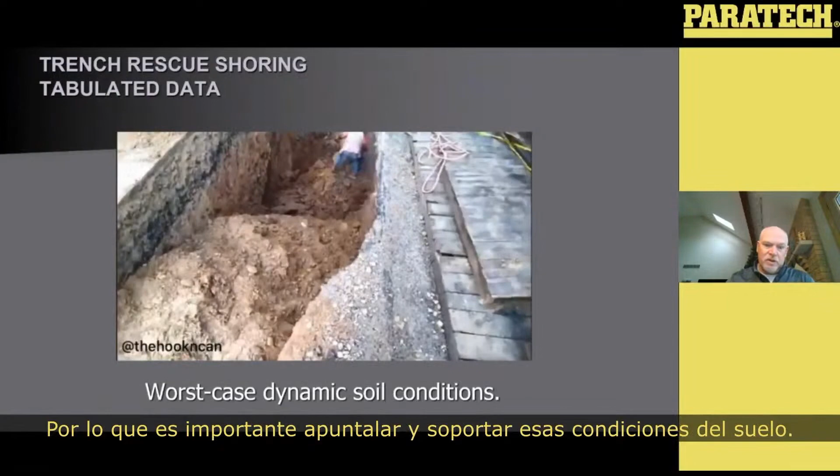That's why it's important to have shoring in, so you can support those types of soil conditions. The 3 charts of tabulated data I'm going to share with you today are for Paratech struts, for wales, and for trench rescue panels.

When we put these charts together, everything was built for a 2-to-1 factor of safety, to make sure there's a margin of error in case the soils get a little water in them, the soil pressure might be a little higher than what we're predicting with the TL method. That gives a little room for error, so these should work for most common trench rescue sites.

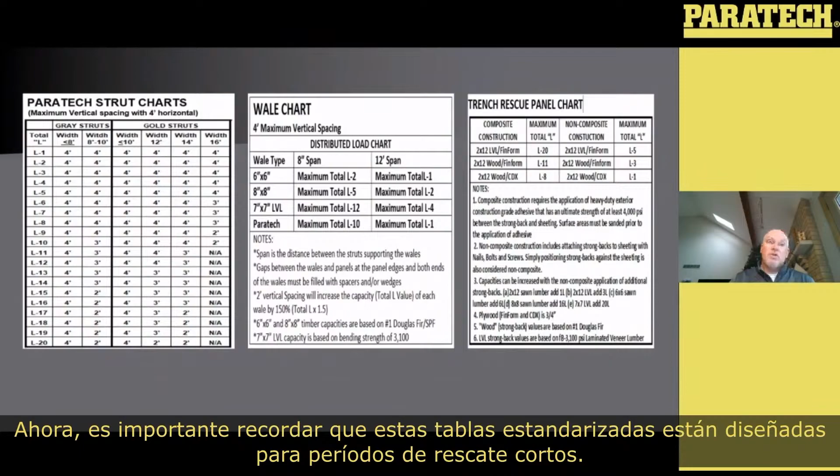The important thing to remember with these data charts is that they're intended for short-term rescues, meaning a shift of say 12 hours. Would 13 hours be breaking the rules? Not really, but you shouldn't be using this in a rescue lasting multiple days on end. As soil sits longer, the forces start to increase more and more. In the TL method, soil pressures were developed on this shorter term span.

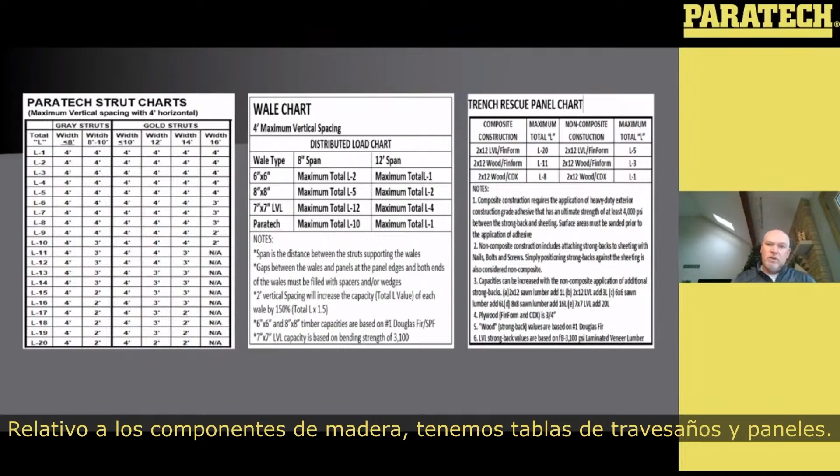These charts also use published capacities for manufactured equipment. Nothing was done to the Paratech chart - we didn't go back and recalculate capacities for the struts. We used Paratech's published capacities for a 2-to-1 factor of safety compared to the soil pressures coming out of the TL method. Anything using wood, as you'll see in the wale charts and trench rescue panel charts, used published capacities from recognized national lumber standards that many engineers use, and bending strengths provided by the manufacturers.

We've also done destructive testing on many of these things to make sure the assumptions we're making are accurate and come up with viable numbers.

So we'll start with the strut chart. A few things I want you to look at right off the top: maximum vertical spacing with 4 foot horizontal. Basically this chart is made to have struts every 4 foot horizontally, so if you're using your standard 4x8 rescue panel with a strong back up the middle, you'll have struts at every strong back, which gives you that 4 foot spacing. The only thing that's going to vary is your vertical spacing in between struts.

Now, looking down a little further, we see 2 columns for gray struts, and then 4 columns for gold struts. So this is showing both options.

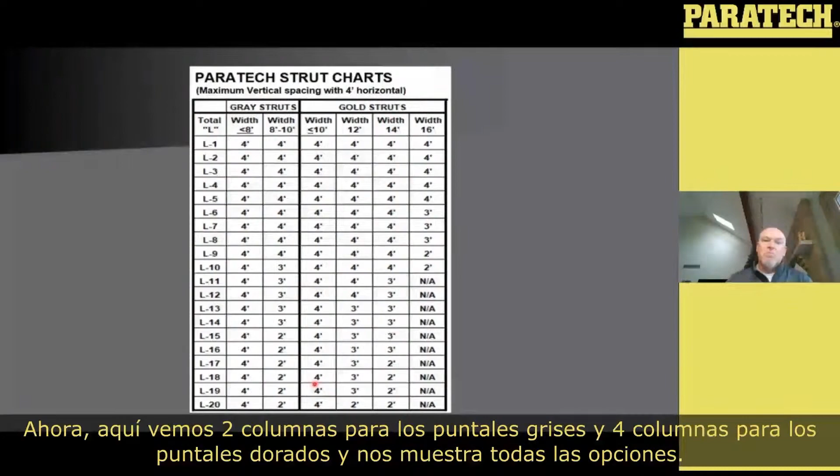The next line down, you'll see trench width: less than 8 feet for gray struts, widths from 8 to 10 feet for gray struts, and for gold struts you have less than 10, less than 12, less than 14, and less than 16. By measuring your trench width and going to the next higher column, that's going to tell you the vertical spacing you want.

So I'm going to run through a scenario, and you're going to want a pen and paper. Here's a checklist - if you could write this down on a piece of paper and treat it like you're making a table. Write these words down on the left side and leave room for columns on the right side, because we'll be using this a couple times as we go through these scenarios.

You're going to want to have: trench width, simple L distance, area of surcharge within the simple L, additional load from the surcharge whether it be spoil or equipment, total L, and shoring equipment selection. This is basically going to be the result of all the things above. Hopefully you've got that all written down - if you can do it like a chart with 2 or 3 columns to the right, that'll save you having to write this down again.

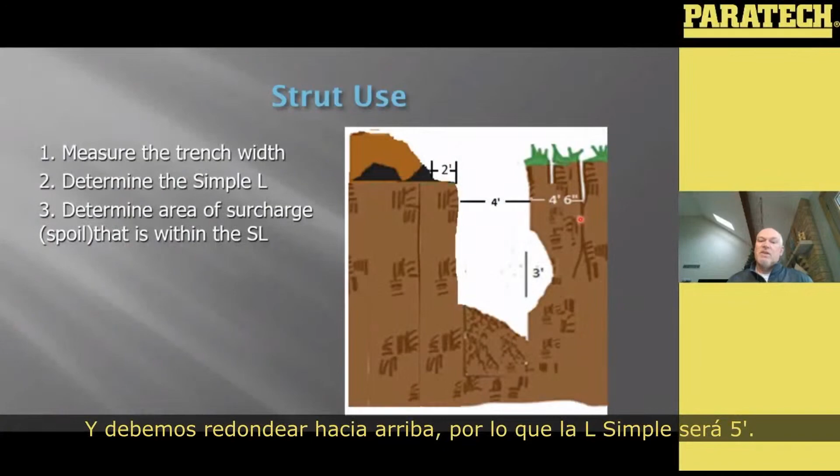After that, we have to determine what the simple L is. We're going back to Ron's presentation on what that is. We know what signs of damage at the trench and trench lip look like. Our image here is showing us a 3 foot belly failure that collapsed into the trench, but we also have fissures going out to 4'6". As Ron told us, this is the next sign of failure. So even though this did fail at 3 feet, our next sign is 4'6", so that is really what our simple L is. We want to round that up to the nearest foot to keep things easy, so this would have a simple L of 5 feet.

We also have a spoil pile here, and it's 2 foot back from the toe. So if our simple L is 5 feet and our spoil pile is 2 foot away, 5 foot would be back here. That means 3 feet of that spoil pile, 5 foot minus 2 foot, is within our simple L.

So this is what we have on the checklist so far. Your trench width is 4 feet, your simple L is 5 feet, and the area of surcharge within the simple L is 3 feet. Again, that was the 5 foot simple L minus the 2 foot back from the spoil, so that'd be a 3 foot area of spoil that's in the simple L.

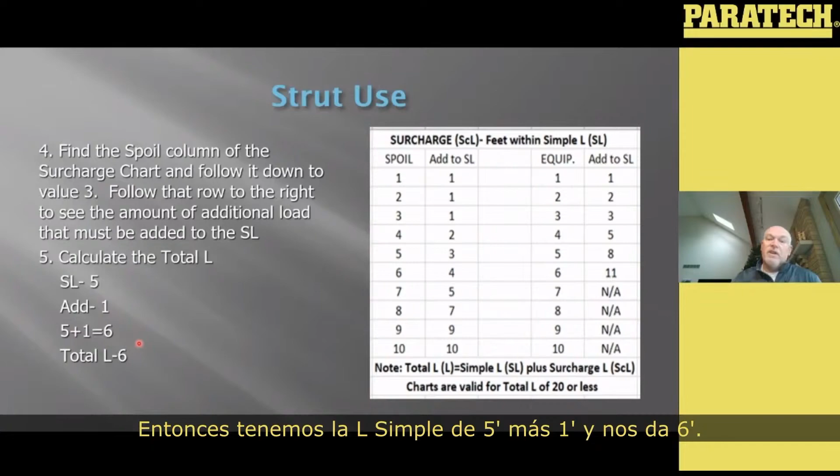Now we're going to look at our surcharge table that we have to determine how much we have to add to the simple L to get the total L. With the simple L of 5, and 3 feet of spoil within the simple L, that tells us we have to add 1 foot to the simple L. So if we take our 5 foot simple L plus the 1, that gives us 6 feet. So in this case, our total L for this trench would be 6 feet.

So this is what our chart looks like now. Using that surcharge chart, we knew to add 1 for this, which gave us a total L of 6 feet. So now we have to go and select our struts.

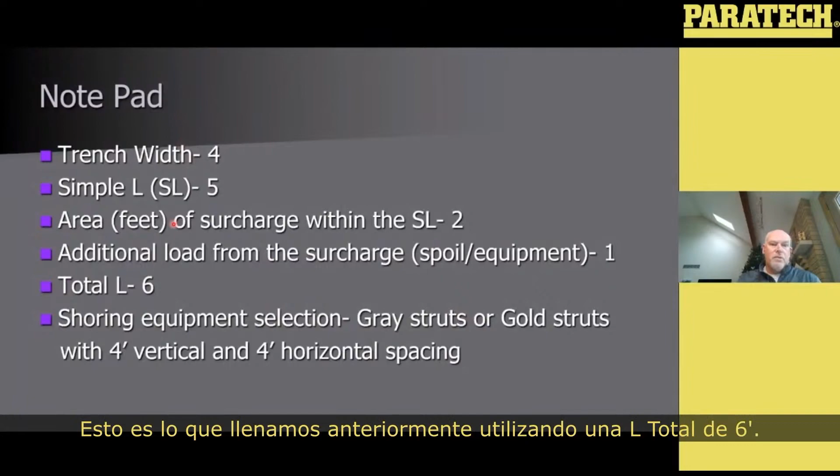So this is what we end up with on our checklist. All of this we had filled in previously using the total L of 6 feet in the table. That tells us we have gray or gold struts with 4-foot vertical and 4-foot horizontal spacing, so basically 2 struts per panel.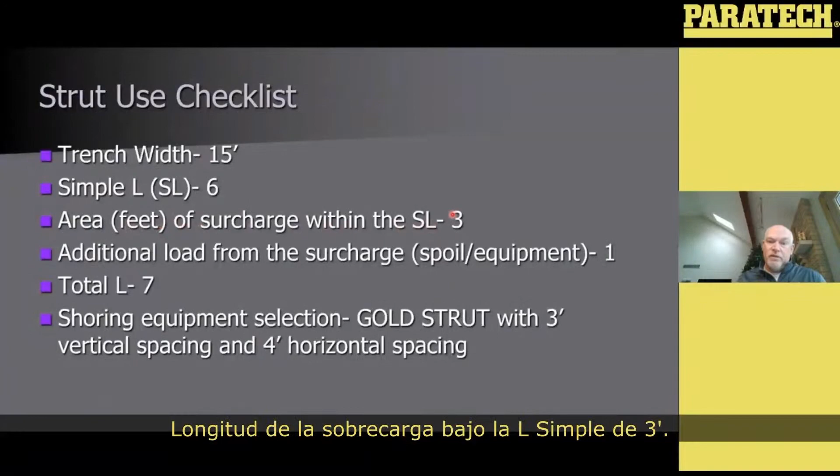So this is the checklist all filled out. Hopefully you were able to do this with the hints I was giving you, but you should have come up with a trench width of 15 feet, a simple L of 6 feet, area of surcharge within the simple L of 3 feet - that was 6 feet minus 3 feet pushed back from the toe. Using the chart, that should have given you an additional load from the surcharge from spoils of 1 foot, for a total L of 7 feet. Going into the strut chart, that tells you that you have to use a gold strut with 3-foot vertical spacing, 4-foot horizontal spacing. So this is what your result should have been.

So now we'll discuss the wales. This is the chart we have for wales. You'll notice up top it says 4-foot maximum vertical spacing. The other important thing to notice here is distributed load. By using a distributed load as opposed to a point load, you can almost double the capacity - actually you can almost quadruple it. So those are two important things to keep in mind.

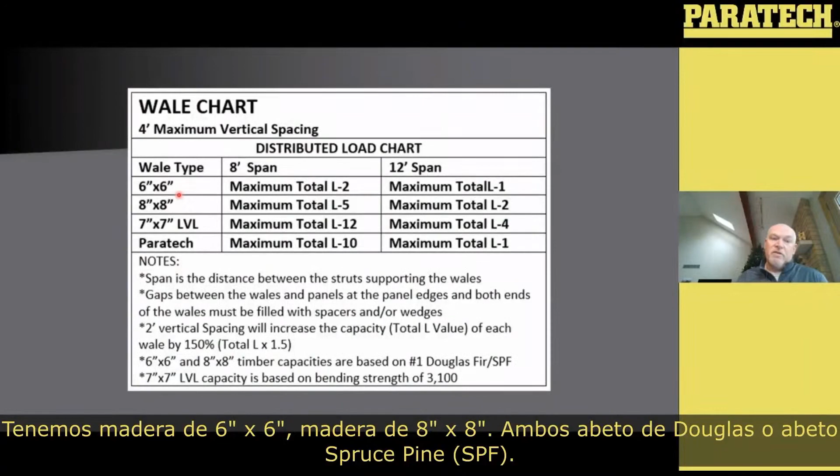Now we have an 8-foot span, which means 8 feet between struts that are supporting the wale, or a 12-foot span. In an 8-foot span, you'd have one panel being supported by the whale, and the other two panels on either side have struts on them. In a 12-foot span, you'd have two panels supported by the whales. We've got wale types - common materials that teams are using for whales. You have 6x6 lumber, 8x8 lumber, both of those would be either Doug fir or spruce pine fir, hopefully top quality lumber without a lot of knots or checks or splits in them. We have 7-inch by 7-inch LVL beams or Paratech aluminum wales.

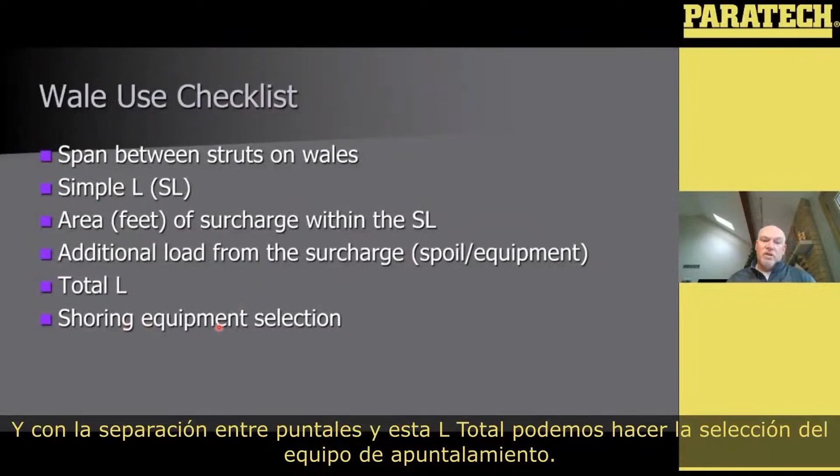Here's our wale use checklist, which works exactly like the strut use checklist. To determine what whales to use, we need to know the span between the struts on the whales, the simple L, the area of surcharge within the simple L and the additional load from that surcharge—whether it's spoil or equipment—which goes back to the surcharge chart, giving us our total L. Then, knowing the span and total L, we can select our shoring equipment from the wale table.

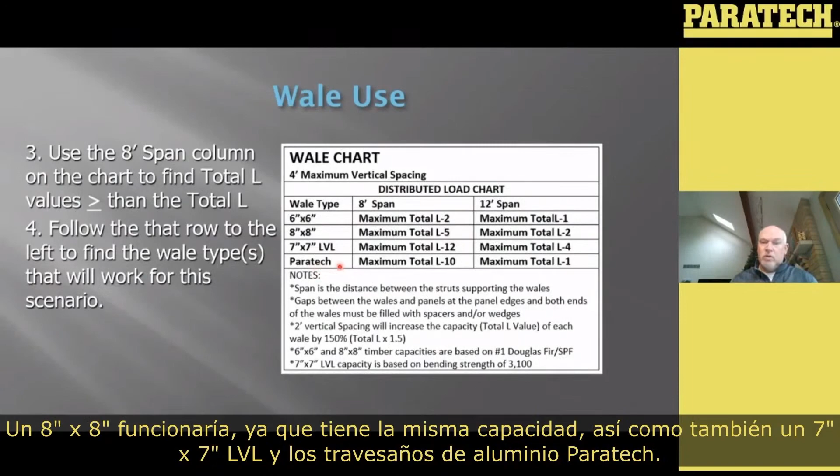Now we go into our wale table to select our equipment. We look at these entries to find out what works for an L of 5. At an 8-foot span, a 6x6 will not work because it doesn't have enough capacity. An 8x8 will work—it has an L equal to 5—but also a 7x7 LVL or a Paratech aluminum wale will work. So that gives you 3 different options. Remember, the load has to be distributed, which means you need spacers between the strong backs and past the end of the last strong back.

So this is our final solution. Based on the information we had, and going into the table, the equipment that will work is an 8x8 Doug fir spruce pine fir whale, a 7x7 LVL laminated veneer lumber whale, or a Paratech aluminum wale.

So that brings us to panels. I would assume everybody is familiar with rescue panels.

What has typically been used throughout the years has been FinForm with a 2x12 lumber strong back bolted to it in 3 places. What we found, and it was something that I brought to Ron many years ago, and we've done a lot of testing on, was composite construction.

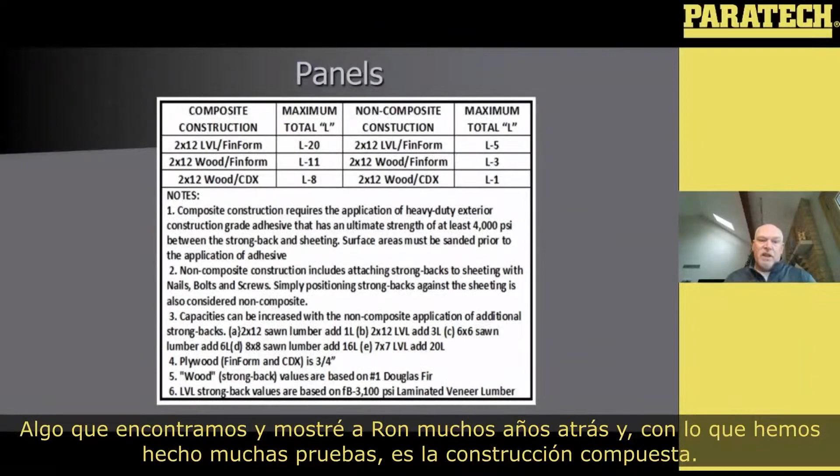Now that's how this table is broken up. On the right, you will see values for capacity for non-composite construction, and on the left, you'll see ones for composite construction. And you'll see that the composite construction values are much, much greater.

Now, what composite construction is, and the best way to explain it is to think of a steel I-beam that gets welded together. So you can take 3 plates and put them together in an I-shape and weld them to each other. That weld is stronger than the material itself. Basically what it does is take those 3 pieces of steel and turn them into 1 new piece of steel. So we're considering doing the same thing with wood.

So instead of just bolting the strong back to the wood, which allows the wood, the lumber, and the panel to move relative to each other, there's slip between them. So when you connect them with bolts, they're just acting as individual beams. But when you connect them together with construction adhesive, which is most appropriate for wood, and keep them from slipping relative to each other, now they're acting as a new, larger, solid piece of wood that acts together. By doing that, we get a much greater capacity out of it.

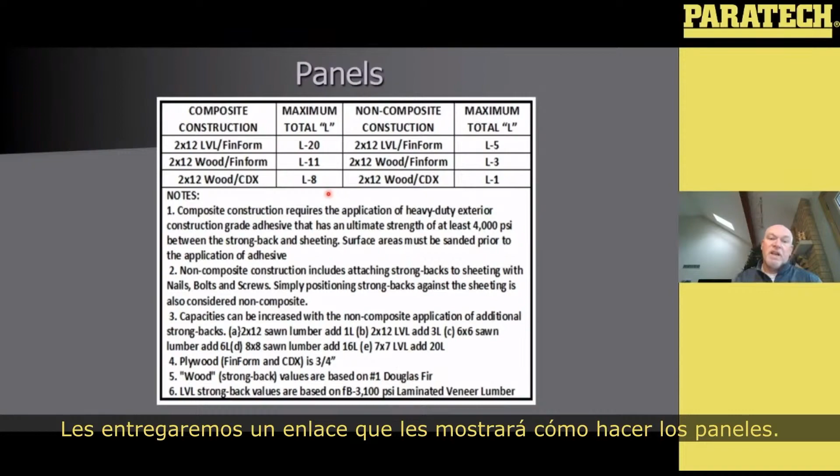Now, we'll provide a link that shows you how to build these panels compositely, and more importantly, test them to assure that the way you're building them is getting you that composite behavior, because it sure wouldn't be good to expect an L of 20 and really be getting an L of 5. But if you take the time to build them right, you can get nearly 4 times the capacity out of them just by adding construction adhesive.

So now we're going to walk through the panel use checklist, so we can determine what panels we need for a trench incident. Again, this should be very familiar to you because it's very similar to the other ones. But what we're going to need is our simple L, our area of surcharge within the simple L, additional load that comes from that surcharge, whether it be spoil or equipment.

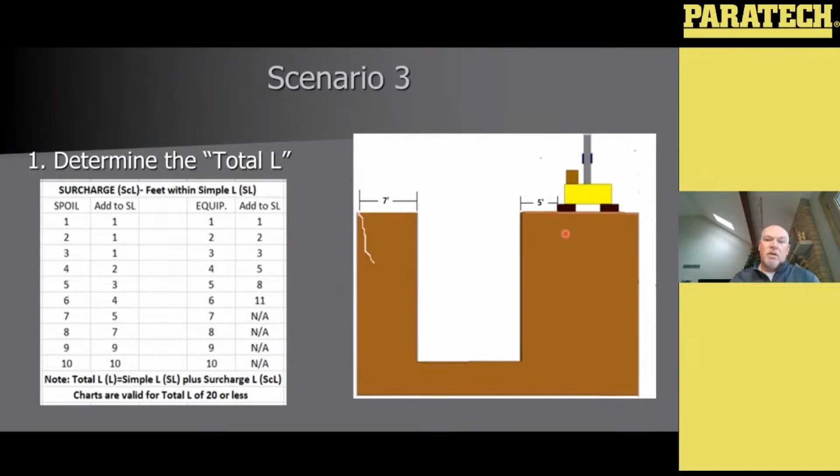So again, we know that's our simple L now, right? We're getting good at finding that. Our equipment is 5 feet off the lip. So we know that 2 feet of that equipment, 7 minus 5, is within the simple L. So this time in our surcharge chart, we're going to look at the equipment column.

We go down to 2 feet, and that tells us to add 2 to the simple L. So now we're going to find the panel that we can use. Going back, our simple L was 7 feet, and we added 2 for the equipment, so that gives us a total L of 9 feet. So now what we do is we go in here, and you'll notice at L equals 9, none of these non-composite panel options will work.

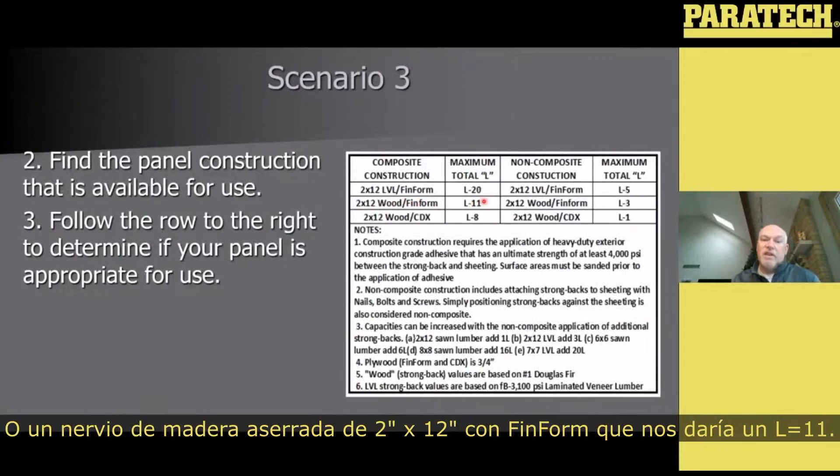If we come over here, only our composite ones will work. So either you can use a 2x12 LVL with FinForm, which would give you a capacity of L equals 20 feet, or a 2x12 sawn lumber strong back with FinForm, which would give you an L of 11 feet. A panel with just CDX plywood is not going to work for this case.

So here's our final solution. Simple L of 7, area surcharge within the SL is 2, which adds 2 to our simple L, giving us a total L of 9. And here are the two solutions that we said would work, both of these being composite panels, which means they're screwed and glued.

As a summary, the tabulated data we gave you in the charts is designed for use in trench rescue soil conditions. All of our horizontal spacing was set for a maximum of 4-foot spacing, so it will line up with the strong backs on adjacent panels. This is designed using the T-L method to include unstable and dynamic soils.

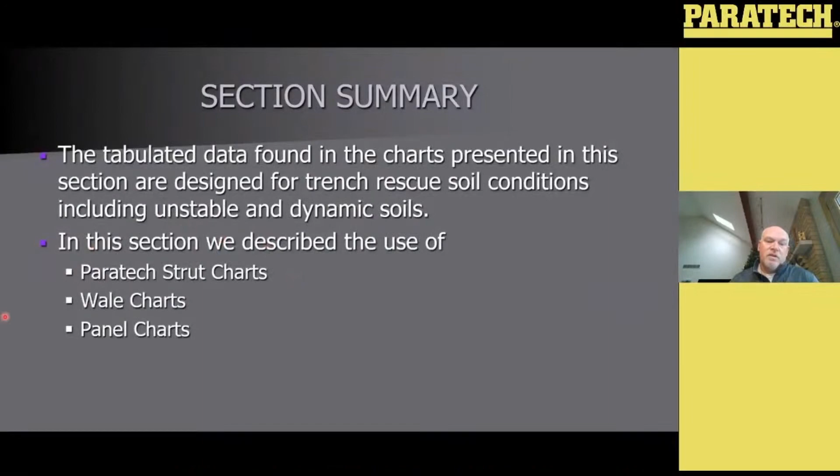We went through how to use the Paratech strut charts and gave you a simple checklist to select the proper struts. We did the same for wales and talked about distributed loads for the wales and how important that is. Then we went through the panel charts to help you select what panels you're going to have.

Now, the one thing I hope you get out of all of this, if you study the wale charts and the panel charts, is that if you look at premium lumber like LVLs and FinForms, you get so much more capacity out of them if you take the time to build them right and use the premium materials.

So that wraps up my section. I'll hand it back over to Ron for the closing.

And finally, we showed you a way to utilize trench rescue shoring specific tabulated data to help you select the proper and safe shoring materials and equipment.

If you have some notes down, or want to make some notes based on that summary on any of the topics we've discussed here, we are going to move on to the question and answer period, and we'll be entertaining your questions here in the next couple of minutes.

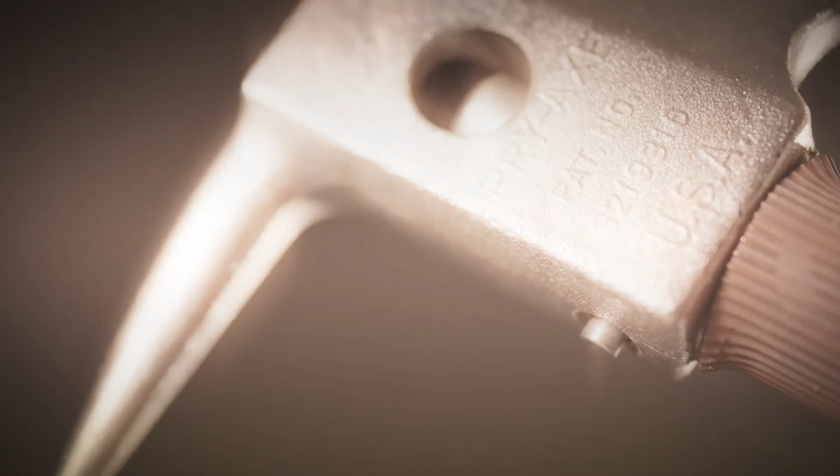This was while I was in the Army. My two partners, Howie and Bob, agreed that they'd like to try it. The first run was 2,000 units. When I got out of the Army in 1965, my first task was to get rid of these damn Pry-Axes, because they're costing us a fortune sitting here.

Little by little, they gained recognition, and we started building in improvements to the tool. Each time we made a release of forgings, we tried to incorporate features that would make it better. Every change in the tool was an improvement. The tool that started it all, over 50 years of continuous production and continuous improvements: the world famous Pry-Axe.

From one innovation to another, meet the Halligan tool.

The fire departments had very limited choices. Some fire departments were doing forcible entry with a crowbar they got at the Ace Hardware store. So when they'd see this quick and decisive forcible entry tool, that was a fairly quick success, and we sent thousands of them. We used to weld them, but the weld wasn't as good because it was damaging the structure of the material. So we pressed this instead.

The ultimate disaster preparedness tool. No strings attached - safely direct optimum impact exactly where you want it.

New problems require new tools. Titan Crash Axe - the lightest, most advanced personal rescue axe, designed with and for the pararescuemen, the PJs, U.S. Air Force Special Operations Command.

We started that project with full-size pencil sketches, then clay models, then 3D models. I had a whole Tupperware container full of 3D prints, just tweaking things and changing things. The whole thing is skeletonized, kind of trellised out so that it provides a really strong grip with gloves and gets the whole thing under that 2.5 pound limit.

Engineered to be as light, strong, and customizable as possible - the only axe of its kind.

Having refined our manufacturing and engineering expertise, we move to revolutionize another plane of rescue.